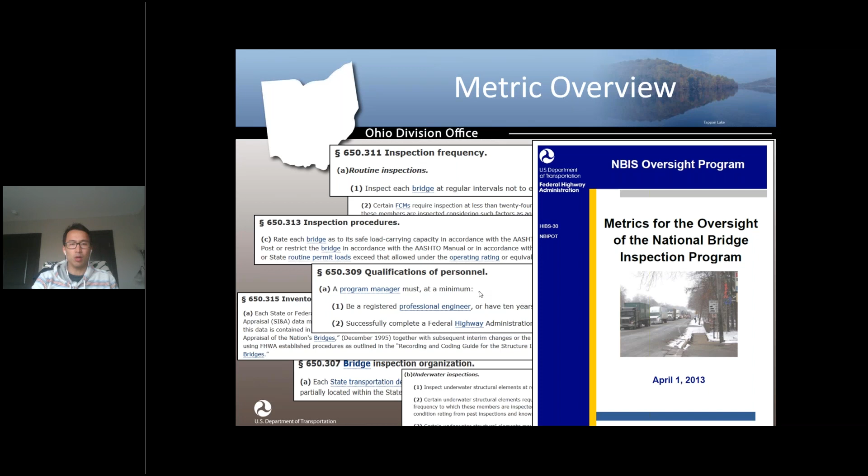So the 23 metrics is kind of a black box for those outside of the agencies. What it is, Federal Highway took the NBIS regulations and broke it down into 23 measurable metrics, and does an assessment on each one. You have four types of compliance status.

Compliance means everything is all good, and substantial compliance means there's deficiencies that need to be addressed that require a short-term improvement plan, what we call an IP. Conditional compliance is more substantial deficiencies and requires a more long-term plan called a plan of corrective actions. Non-compliance means deficiencies not resolved - that's something we don't ever want to be at.

As we started this new 23 metric process review in 2011, for the whole state of Ohio we had 11 compliance, 11 conditional compliance, and 1 substantial. As of last year, we improved all the way to 19 compliance, 1 conditional compliance, and 3 substantial compliance. So we've made huge progress in the last 9 years.

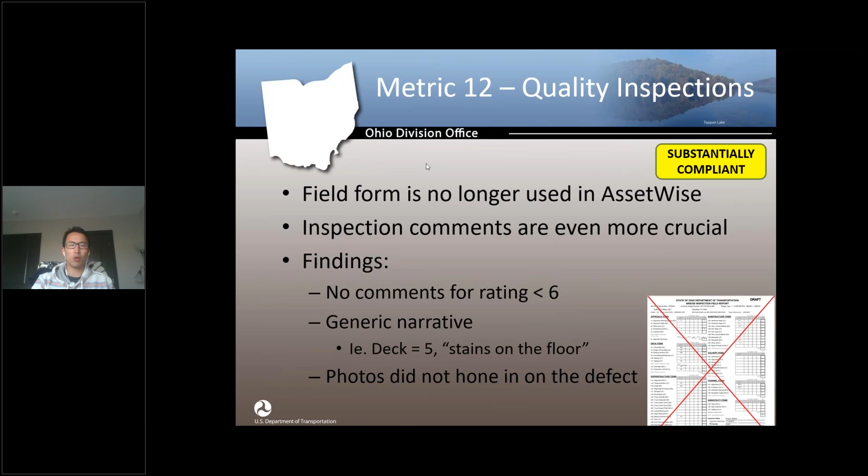So for this metric, we found a handful of bridges that do not meet the intent of the metric requirements. This metric is substantially compliant, so it requires an improvement plan: ODOT would develop written standards for consistent reporting and inspection comments, and present a webinar to the inspection staff, which is what we're doing today.

That's something Mike Brokaw will go over in the later presentation, and then provide comments for all the condition ratings less than 6 in this inspection cycle. For action number 3, we'll have until the end of the year to complete this.

Okay, moving on to metric 18 for scour. We random sample 19 bridges again, and if a bridge is scour critical, we check the bridge file to make sure there's a plan of action. Also, as you know, we started collecting channel photos.

The inspector has the option to either do channel photos or a channel profile. Most people opt for channel photos because it's quicker and easier, and we want to make sure the channel photos are done correctly. Then we want to verify that item 113, the scour rating, is consistent with the coding guide.

So in the findings, we found one bridge that is scour critical did not have a plan of action. Upon further review, the bridge is no longer scour critical, so we gave it a pass on that one.

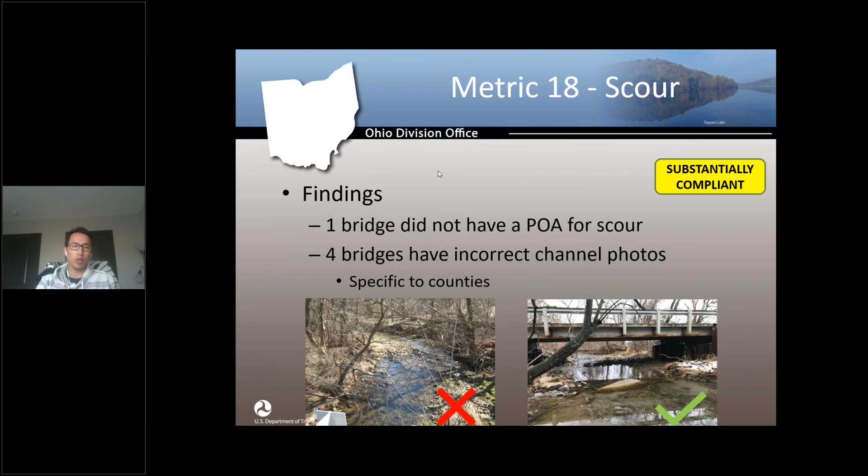So the action items are: present a webinar to inspection staff, and Mark Stockman will go over the proper ways to take channel photos. Action number 2: Mark Stockman is retiring, so Mark Sherman will spot check some of the inspection reports in all the counties and make sure all the channel photos are taken in the proper direction.

And lastly is metric 21 for critical findings. Again, we random sample 15 bridges that have critical findings. We want to make sure FHWA is notified periodically, and when a bridge is considered a critical finding, that means a condition rating less than 3.

They would have critical finding forms or inspection comments documented discussing the critical findings and how they're going to be addressed. More importantly, we want to make sure immediate actions are taken in a timely manner to address those critical findings.

Of all 15 bridges, we found one bridge that took about 4 to 5 weeks to implement the safety actions to put the barrier to divert the traffic. I think it's the deck and guardrail that has a lot of cracks and it's unstable, and the owner took too long to implement the safety actions.

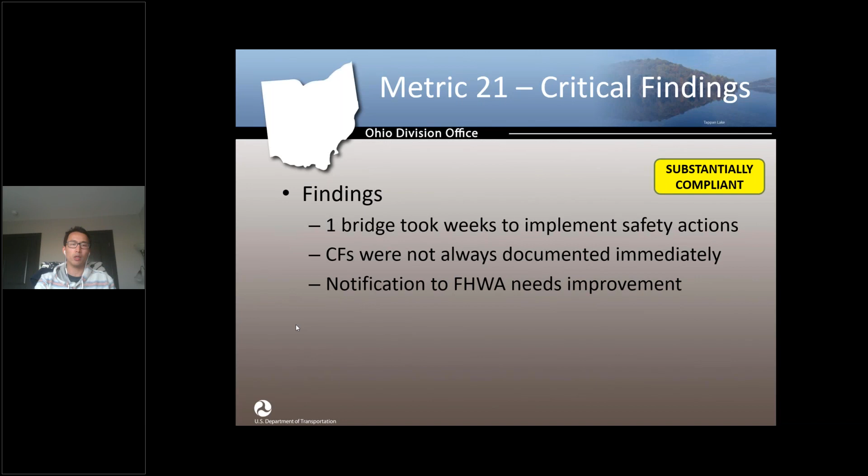So action number 1 is create a new critical finding form. This is a form you can find in AssetWise today. Whenever you rate a condition component rating less than 3, you would go into this link and fill out the critical finding form.

And whenever an inspection report contains a condition rating less than 3, ODOT and me and the owners will receive an automatic email, to make sure that the critical finding is addressed and followed up.

And lastly, present a webinar to the inspection staff. I think that's something either Mike or Mark will talk about at the later presentation as well.

So lastly, for the NBIS update, as you all hear, there's a new NBIS regulation coming out with the new coding guide.

Back in 2019, the proposed rule came out, and there was a commenting period that I hope all of you put comments into about what could be addressed and improved in the proposed rule. The commenting period ended in January 2020.

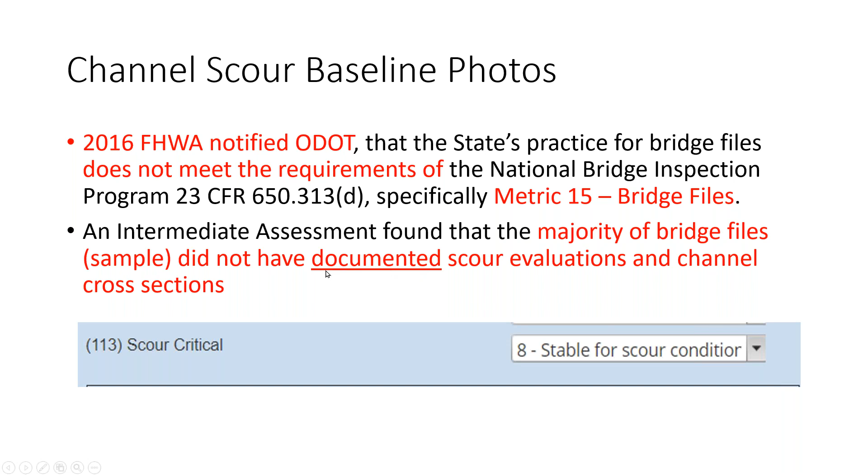But we never wrote down why we chose that code—we never had documentation. So most people chose code 8 or code 5. A few people had a code 4, which is mitigation for erosion. We don't want any code 6. But item 113 is what was driving this.

So to respond to that shortcoming, ODOT developed a procedure for channel cross sections and baseline photos. It's on the Ohio Structure Office webpage under the bridge inspection section, in the miscellaneous resources. You can read that procedure.

Basically, when you have a dive inspection or scour critical bridges where item 113 is a 3, 2, or 1, you must do channel cross sections. All bridges that don't have to do a channel cross section must have baseline photographs on file. They do not have to be uploaded to AssetWise, but it's better if you do.

Otherwise we have to contact you, dig them up, and mail or email them to us. It just saves a lot of time if you do put them up, though it's not required. And if you can't get photos for some reason, you need to do a channel cross section.

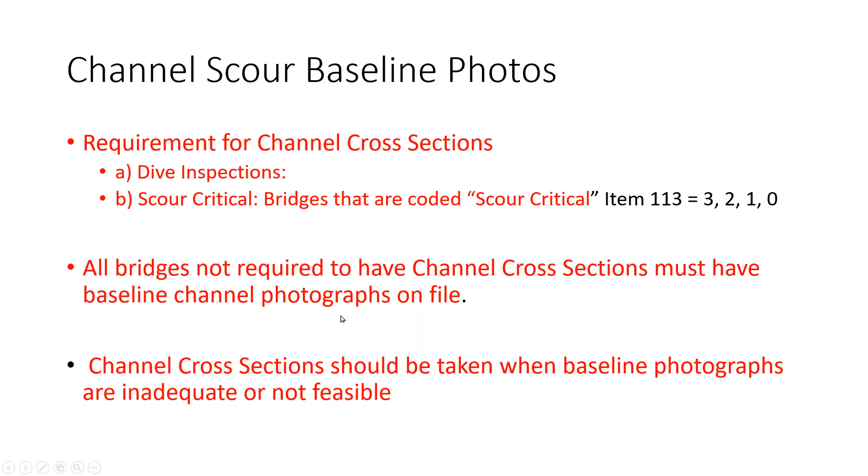For the channel cross section, there's a tutorial in AssetWise under the help section, under documentation. Then in each individual bridge, there's a section for channel bed measurements that gives you a table to input the data and columns and so forth. It will actually plot out a diagram of your channel based on your measurements, because you need to see what those measurements show—it's not good enough just to have numbers. We want to get an idea visually of what the channel is like.

If you're going to do photographs instead of the cross sections, then you also have to agree to a global statement. Most people forget about that. And if you can't agree to the global statement, you have to go back to the cross sections.

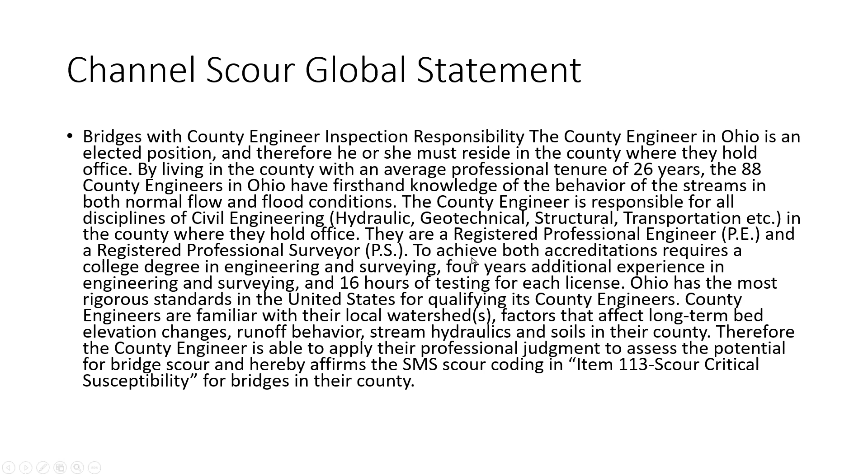So here's what the global statement does—the county engineer is elected, and it talks about his qualifications and so forth. But the key words are right here: the county engineers are familiar with the local watershed factors that affect long-term bed elevation changes and runoff behavior.

Therefore, the county engineer hereby affirms the SMS, which is now asset-wise, Scour Code Item 113. If your county engineer does not know the hydraulics of your county, then he can't confirm Item 113, and you have to go back to channel cross sections. But all the county engineers live in their county, and they know how the streams behave there. So Item 113 is hopefully verified by the engineer and his staff, and that gives everyone a sense of confidence.

That it's done correctly. The photos, you need a minimum of 2 photos, but add more if needed. You need to be upstream and downstream looking at the bridge. And as I mentioned before, we recommend but not require upload to AssetWise.

So the first deadline was in 18. We have to repeat them every 60 months. So in 2023, we'll be looking at repeat. And that's not only for the photos, but also all the channel cross sections. If you can't get the photos, do the cross sections and have them in your file.

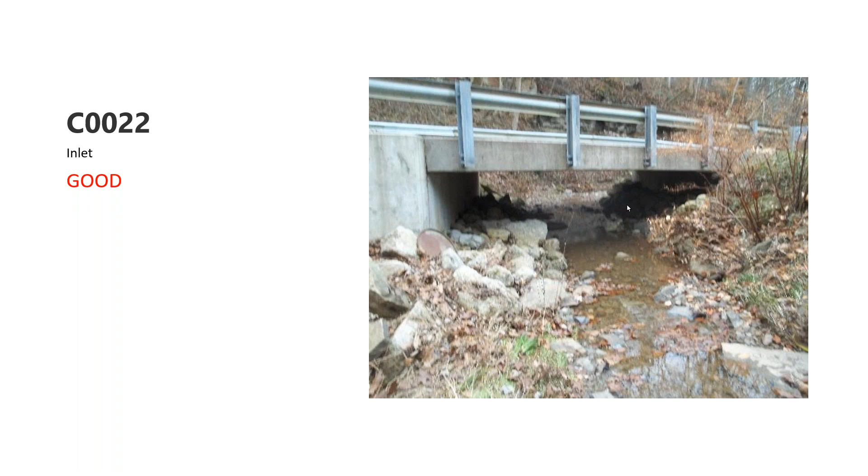I did have another side. Yeah, that's the same bridge, the other side, same thing. We can see it good.

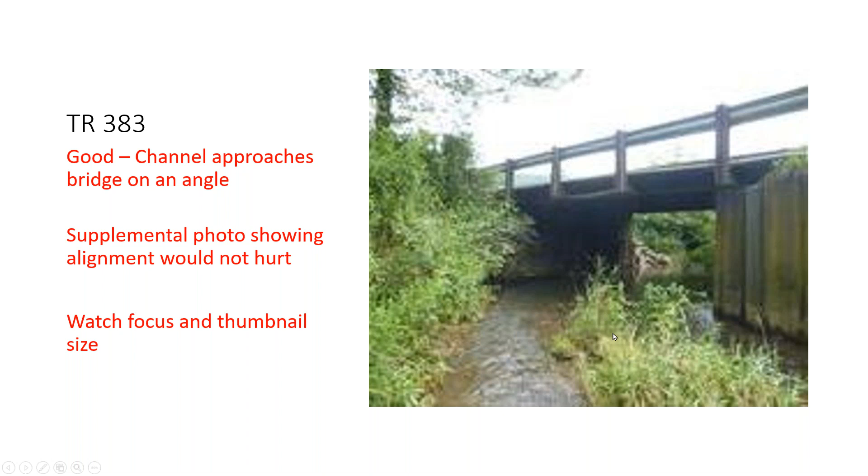Now, Township 383. I left the counties out to keep it anonymous, but here, this channel shows the angled approach to the bridge, and the photograph shows that. Another photo to show how that angle plays with the bridge would be helpful. And watch the focus. This was a thumbnail size picture. When you blow it up, it gets a little fuzzy. So watch that.

So here's the same bridge. Here's some additional photos. This helps a lot. We can see it's on bedrock. We can see the piling goes down. It's a good additional photo.

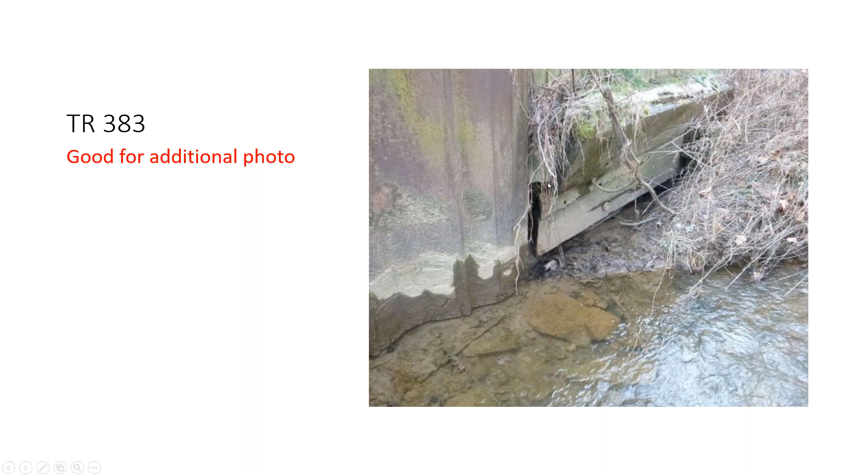Another good additional photo. The channel is just starting to possibly get behind the abutment here. It's good for comparison in the future. Another good additional photo shows the solid foundation for the abutment. Same thing here. So those are good examples.

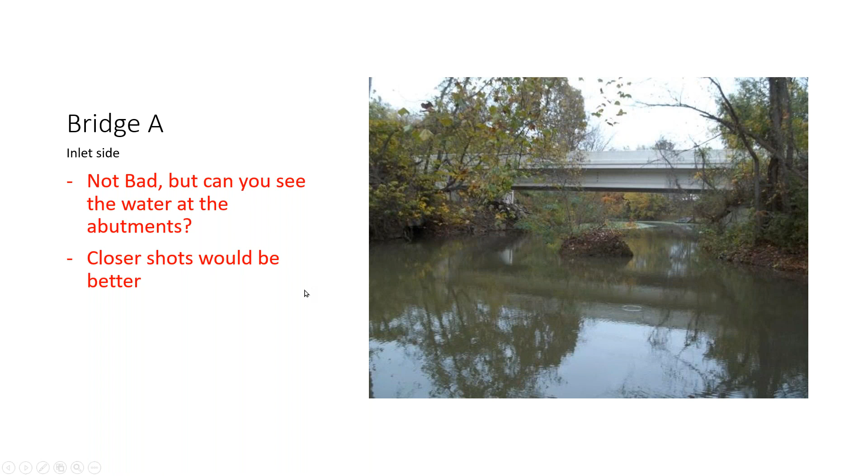Here's a bridge. It shows the bridge from the channel, you think, okay, that's what they're asking for, but it doesn't show us what we need to see. Can you see the water at the abutments? Can you see if it's endangering the abutments, or if there's going to be anything you need to watch? Closer shots would be better.

Here's a bridge. We're looking away from the bridge. This will not count as a channel baseline photo.

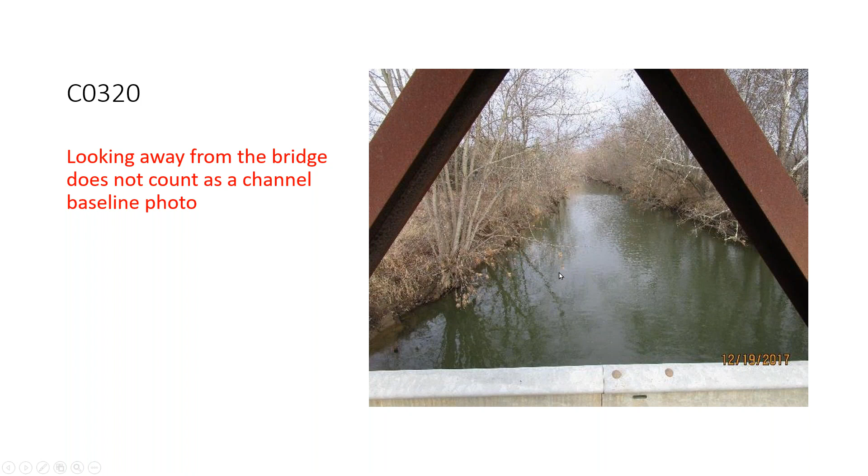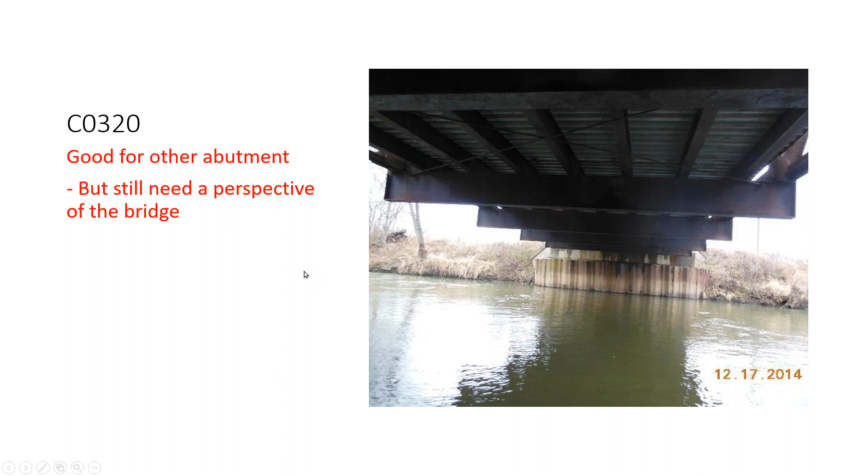Same bridge. Here we go. Now we can see what the channel is doing at this abutment, but we still need an overall picture from back looking at the bridge so we can see how the channel flows under the bridge. I can see the other abutment now, and that's good. I'd like to see a little picture about whether water is getting behind the wall or not. So, again, we still need a distance, a perspective photo showing how the channel flows under the bridge, upstream and downstream.

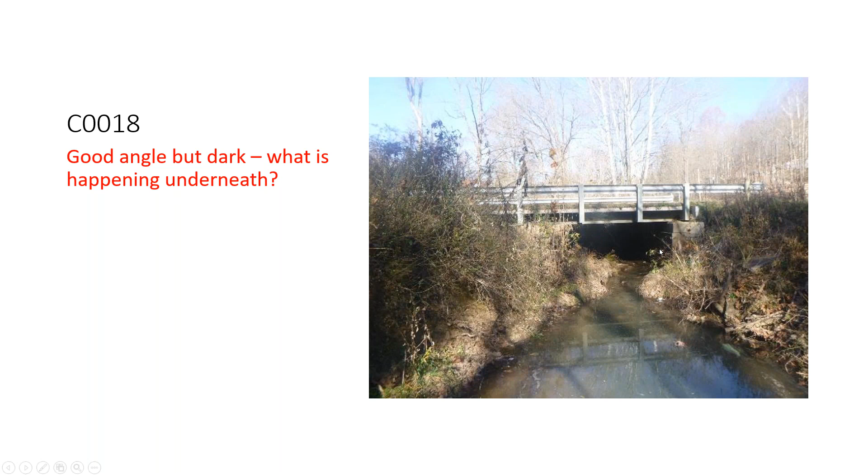Same bridge, more photos, trying to get it right. It's dark underneath, I can't see anything of what the channel is doing. So what's happening? Same bridge, a little lighter. I think the channel is going along that abutment.

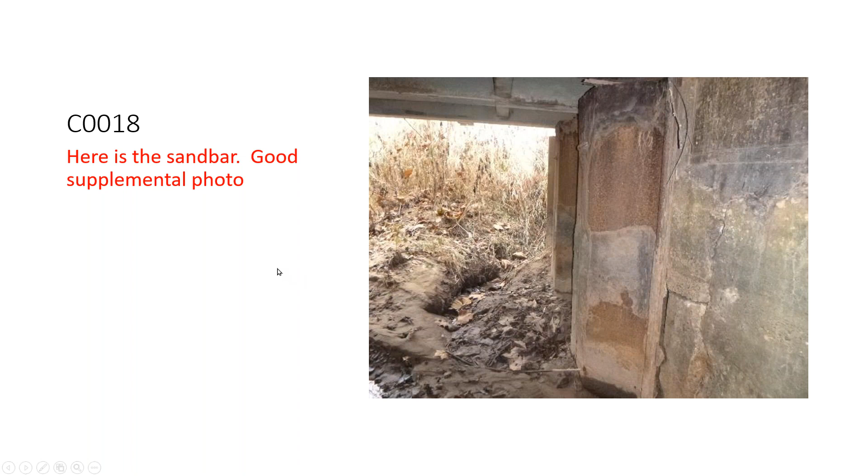The comments refer to old concrete and a sandbar. Well, here's the concrete, that's good, we have that in the photo. Here's the sandbar, that's good to have in the photo too. These are good additional photos now, so we're starting to get a clearer picture, something we can refer to in the future. This is a nice photo underneath. The sun makes it hard to see, but now you can see the channel is along that abutment, and the toe on this side is not against the abutment.

So you need to become an amateur photographer as well as a bridge inspector. You need to watch your exposure, the picture size, the sunlight, and compose your pictures properly.

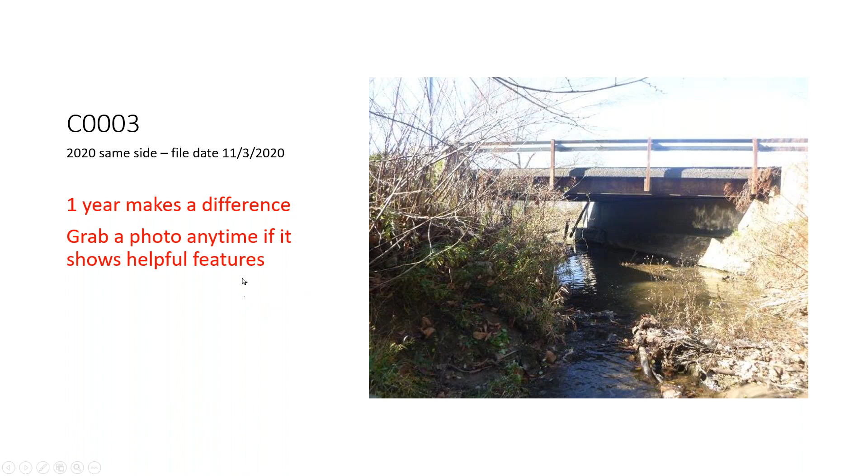This is in 2019. In 2020, they took the same picture and it's changed a little bit, which is good for reference. But grab a photo anytime if it shows helpful features. For example, compare the two: 2019, that is an excellent photo. 2020, that's pretty good, but not quite as clear as 2019. It just gives you an example - if you have a time of year or a different inspection that shows better photos, grab it and use it for your channel photos.

This bridge on the right, same one. Here's the cattle fence, and look, now we have a gap below the foundation encasement. Here's the close-up of that gap. But the comments refer to the rear and forward abutments, right and left side. It'd be really helpful if you could label these pictures - we don't know which comments apply to which part of this picture.

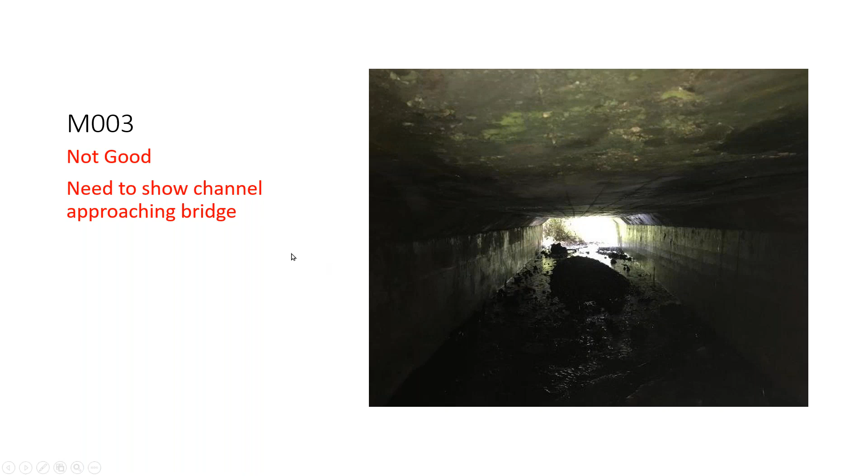Here's a typical photo I see a lot on culverts, where they're standing inside the culvert taking a picture through. It does not show what we need to see, how the channel is approaching the bridge. So one from the outside looking down doesn't help at all. Here's the bridge, and I can maybe see the channel toe on that side. It's really hard, dark, can't see anything on this side, so that's not going to help.

This angle is better. I can now see the flow line, the channel, the toe of the channel right here, the sand beach. I can see the toe of the channel over here, but I can't tell if the channel banks are flat, if they're scoured, if they have a hole. I can't tell the shape of the channel banks or the shape of the waterway opening. So this is not a good angle to take your channel photo from.

You want to be in the channel, not on top, or at least on the bank far away from the bridge.

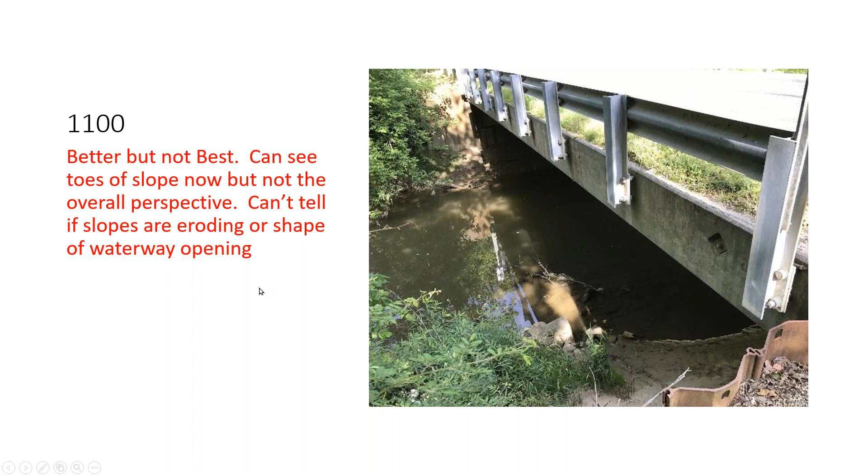Here's a picture. You think at first, hey, this is exactly what they want, showing the bridge, showing the channel. But really, I cannot see the channel bottom on the left or the right, so it doesn't show me what I want. Look on the right - this is just a little bit closer, and it helps a lot. Now I can see the channel on the left side, I can see the channel on the right side, a little sandbar blocking the way. This is great, just being a little bit closer helps.

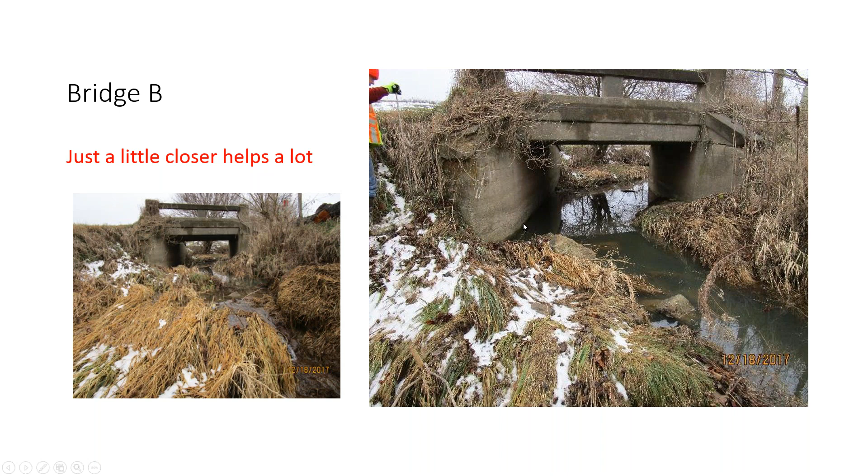Here's the bridge, can't see the abutments. We need different photos. Here's a better picture of the same bridge - now I can see the flow line on the left-hand side, and right there is a flow line on the right. It's helpful to zoom in a little bit on that photo.

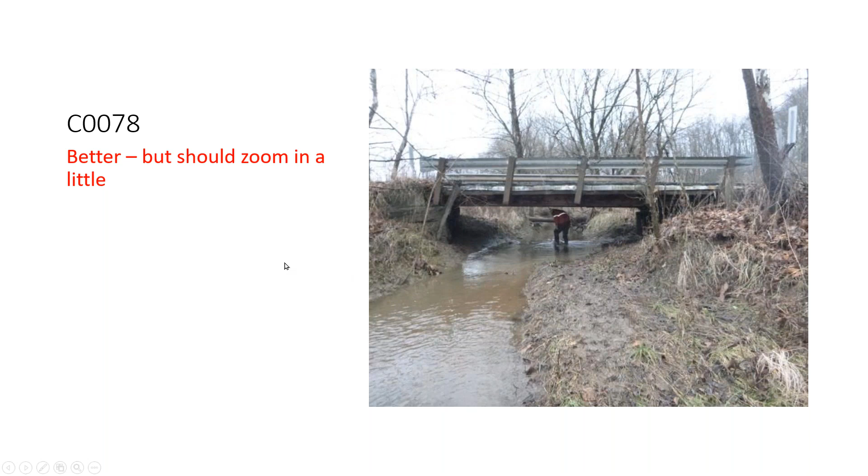Okay, recap. We need to see the channel alignment approaching the bridge and at the toe of the channel at the abutments, one upstream, one downstream, looking at the bridge. If you have poor visibility, brush, whatever, consider using a drone or coming back in the wintertime to take the picture or take a group of pictures.

And if all else fails, take channel cross sections. We need enough detail to compare in future years. We want to look for flow line changes, direction changes, scour, sandbars. And we want to see labels, so which direction you're looking, which abutment you're looking at, which side, upstream or downstream, any particular features. So with that, we're ready for questions, and Mike Burkow can help answer them as well.

Thanks, Mark. Good pictures. I got some questions for you. Ready? Yes. Okay.

When taking updated scour photos, should we strive to take photos from the same angle as previous? Or if better ones can be taken, should we take the better ones? Or both?

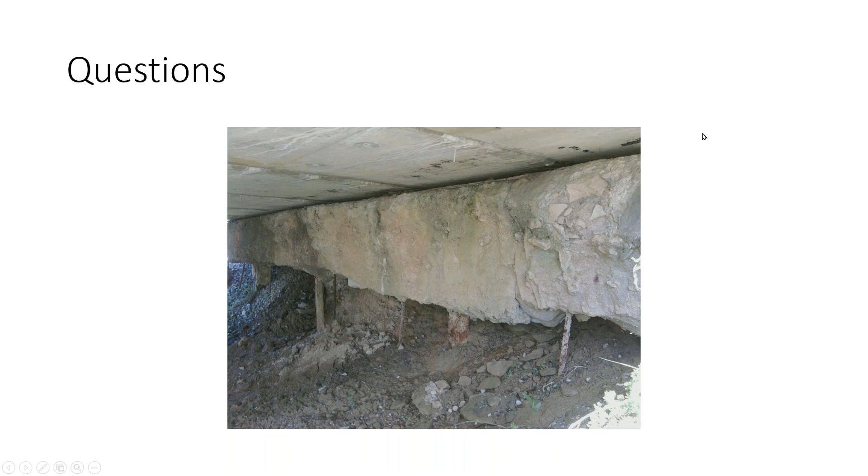You've done the work and gotten there. Snap a couple extras, especially if you can get a better angle for the next inspector. You're also thinking about 5 years from now or 2 years from now, that person trying to repeat the photo, and they'll have a better option if you have a better angle. Yeah, it's a great question.

Got some comments regarding using unmanned aerial, a good technology for channel banks. And the question was, do we need channel photos on non-NBI bridges? It's not required by the feds, to my knowledge, but it's a good idea. But we aren't going to grade you and affect the metric compliance.

Is there a limit in AssetWise for storage of pictures? Well, we haven't found it yet. The short answer is no, but what I would recommend is limiting the megapixels of the photo. Try to bring it down to 1 or less than 1 meg. And I have noticed with some of our more complex structures with lots and lots of photos and files, they do load slower when you bring up the asset detail page. So it's something to keep in mind there.

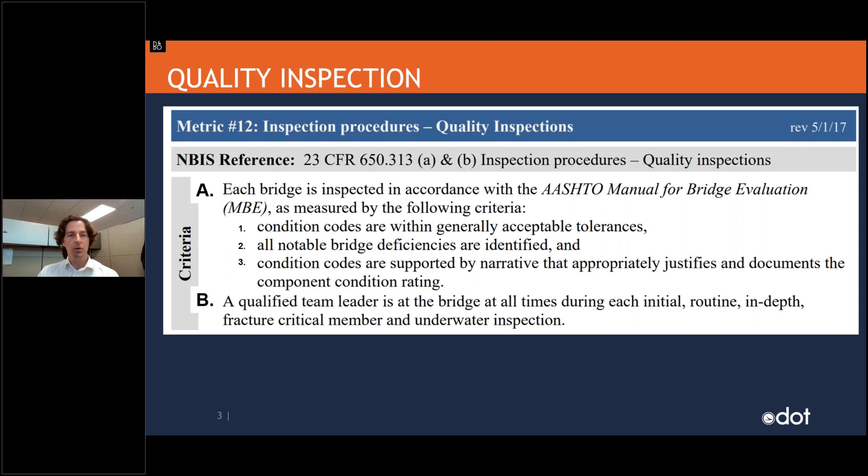So let's look at what a quality inspection is by starting with the reference. The MBE—AASHTO is American Association of State Highway Transportation Officials, of which Ohio is one active state. We're a member of AASHTO, and we vote, and we're active, and we play an active role in helping vote and develop a lot of these publications. Within the MBE, there are two sections that apply to bridge inspection: the bridge files and documentation, and section 4, inspection.

Both apply. What I'd like to do, mainly because most of you perhaps haven't read through this, is share with you some of the bullets within the routine inspections. There's 14 bullets. When each bridge is inspected in accordance with the MBE, we've got different routine inspections: the routine, fracture critical, underwater, etc. This is just the routine. There's 14 things that the MBE says you have to do to have a quality inspection.

Number 1, determine the physical and functional condition of the bridge. Number 2, identify changes from the initial inspection and identify changes from the last inspection—so tracking change. Number 4, ensure the bridge continues to satisfy its intended purpose and safety requirements.

Number 5 is inspect from the ground, from the deck, from the water. We expect wading and probing of substructure units and walking through every culvert, probing for undermining, probing for scour.

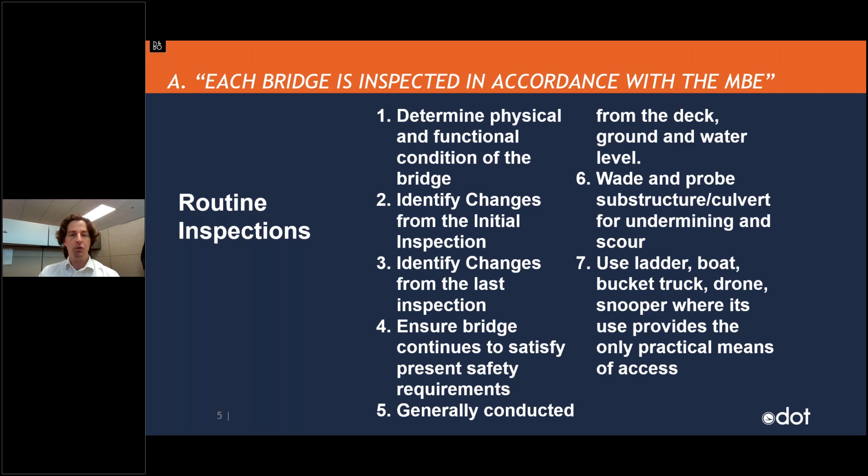And here's the kicker: when necessary, and you have to decide based off of what you see, get closer. Use a ladder, a boat, a bucket truck, drone even, a snooper, where its use provides the only practical means of access. Number 9 is get close enough to determine all condition ratings and element quantities and condition states, evaluate all height and weight restriction signs, and then note suspected or confirmed weight or height posting values.

For scour critical bridges, follow the POA. And 14, for critical findings, follow the critical finding procedure. Jared and Omar are going to talk about critical findings in a little bit, so I'll save that for them.

A1, so I'm going down and using that metric 12 criteria as my outline. Condition codes are within generally acceptable tolerances. So when we talk about condition codes, we're talking about the components or the overall. So the deck, the super, the sub, each one of those get a 9 through 0.

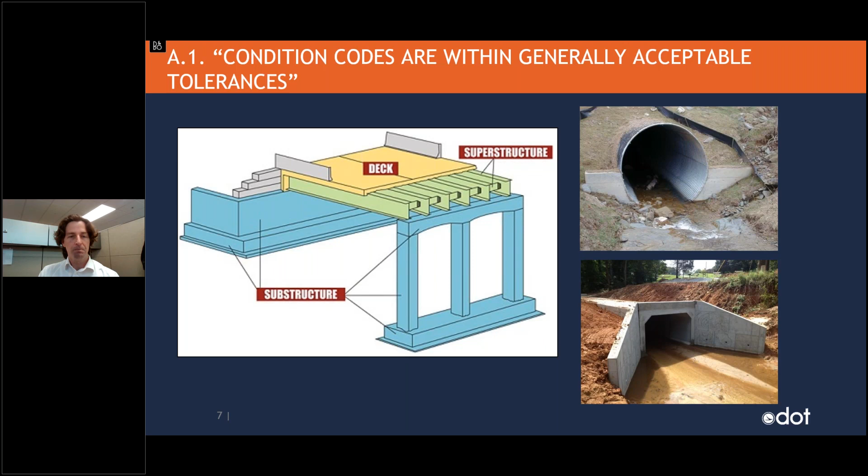And you might notice this is different from the BR86, where we cut away all of the individual 1 through 4 items, and now we just have a small group of the major components on the bridge. If it's a culvert, like the photos on the right, flexible or rigid, then you code the culvert 9 through 0. So those are our component ratings.

Is the 9 through 0 within a generally acceptable tolerance? Now, what on earth does that mean? Well, let's break these out. So the 9, 8, 7s are good. Then we have the fairs, and then the poors, and then the criticals.

In general, generally acceptable tolerances is within 1 of Mark Stockman, Mark Sherman, myself, Omar, those of us doing quality assurance like Kenny, within 1. And I have, not many times, but I have had a number where I said it was a 5 and the inspector said it was a 6, and I said it was not within general, not acceptable. So you can have ones within 1.

The 5 to 4 line, for example, that 5 to 4 line is very important. And if I give it a 4 and you give it a 5, that is probably not an acceptable tolerance. So, but in general, within 1.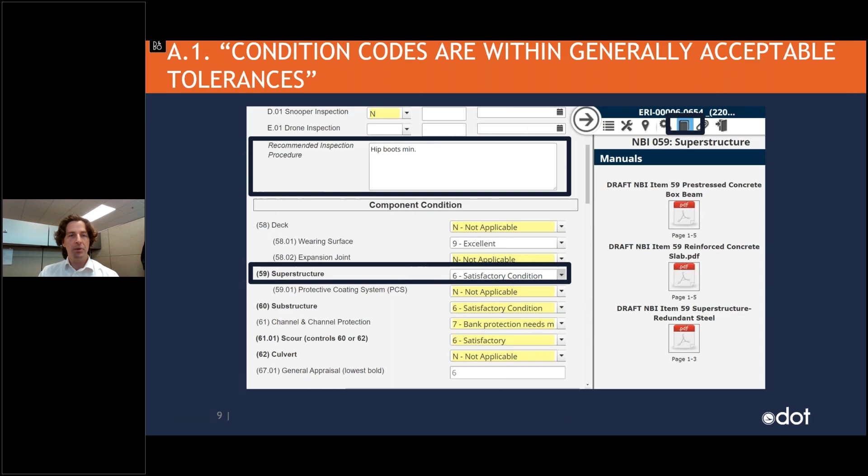So when you open up the PDF, we have photos, we have helpful hints in how to code the 9 through 0s. So within generally acceptable tolerances, within 1.

If we look at the second bullet, all notable deficiencies are identified. What does that mean? Well, Federal Highway, AASHTO, they both say that notable is 5 or less. And I would say because we're within 1 of Federal Highway, why don't you just jump it up to 6 and less? So notable deficiencies, if it's 5 and less, you need inspection comments.

And with a 6, it's a good idea to have comments. So this is just the low bar. I know a lot of you, for a 7, you're putting good comments in. We're just establishing the baseline here.

And here's a paragraph from the document that we sent out earlier. It is considered good practice to include an appropriate description for components in all conditions. Appropriate justification of determined ratings means the lower the value of the condition code, the amount of report time and documentation increases to thoroughly describe its location, extent, and severity.

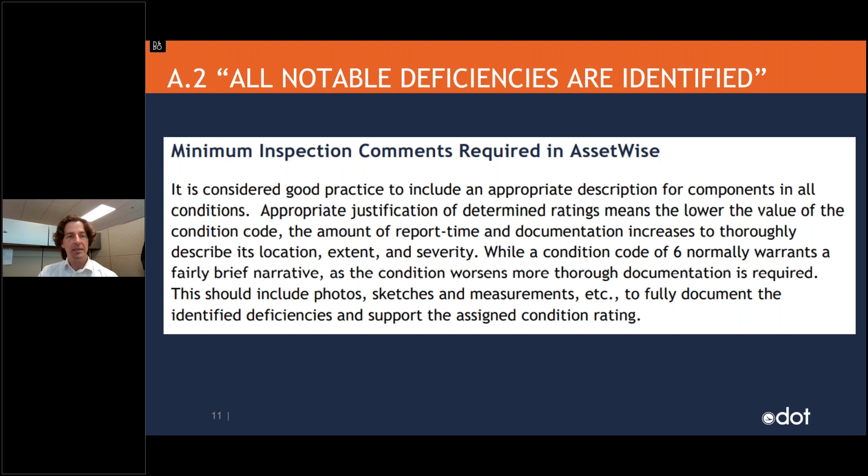While a condition code of 6 normally warrants a fairly brief narrative, as the condition worsens, more thorough documentation is required. This includes photos, sketches, and measurements. Fully document the identified deficiencies. Now, what's the big change here?

We've always said a 6 rating, you probably want comments, a 5, you need comments. The big change is what's highlighted at the bottom: at a minimum, inspection comments specifically are required in AssetWise. So that is what's changed.

We have this place that you have to put your comments, and when? Well, any NBI component—deck, super, sub, deck channel—rated 5 or worse, that is when comments are required. So if we stay within this, all notable deficiencies are identified. In summary, it's 5 or less, those leading to a component rating of 5 or less.

Another thing we're looking for, ensuring that the inspection was done with high quality, is: were certain areas accessed? Were certain areas not accessed? Over the life of the bridge, say it's been out there 50 years, has there ever been a ladder put up at the bearings? For a fracture critical member, are we getting to both sides of the steel? So were certain areas not accessed?

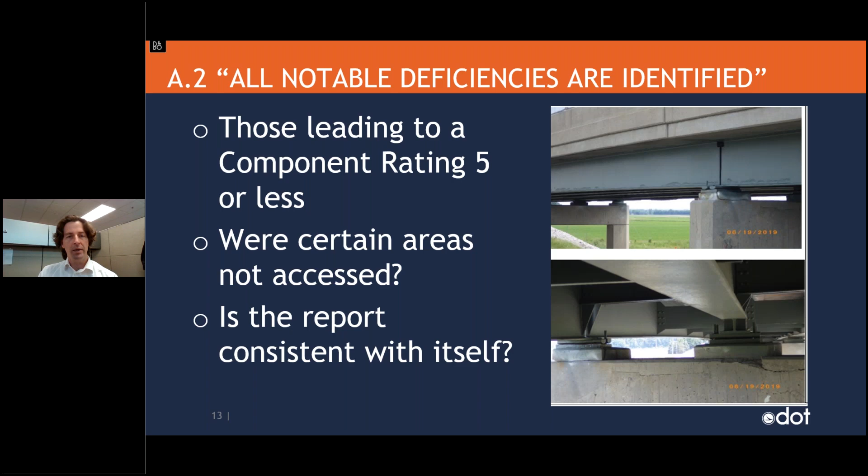And lastly, is the report consistent with itself? That's where we want inspectors to begin looking at different parts of the report. So you have the component ratings, you have the element ratings, you have photos, and you have inspection comments. It should all correlate. It should all be saying the same message.

Now for time and simplicity of message, what I'm talking about is the comments, because that was the thing that was lacking from the review last year. And this idea of coding 9 through 0—I mentioned the 5 to 4 threshold is an important threshold. If we look at that 5 to 4 threshold, let me throw a bone to you that a 4 for poor is adjective advanced.

So for pre-stressed box beams in general, you have more than a quarter of the strands exposed. And exposed means not just visible, it means exposed to the elements. They could be underneath the delamination, underneath some longitudinal cracks.

For section loss, it's more than half of the web lost, or a quarter of the flange lost. If you're curious about how to measure section loss and what 50% and 25% means, watch the online refresher—I go into great detail, probably too much, on how to measure section loss. If you've already taken that class, watch that section again.

For corrugated metal pipe, for our culverts, it's going to be holes. Scour advanced would be exposed vertical faces on a spread footing, or if you have deep foundations, one pile exposed up to 5 foot—that's an easy advanced.

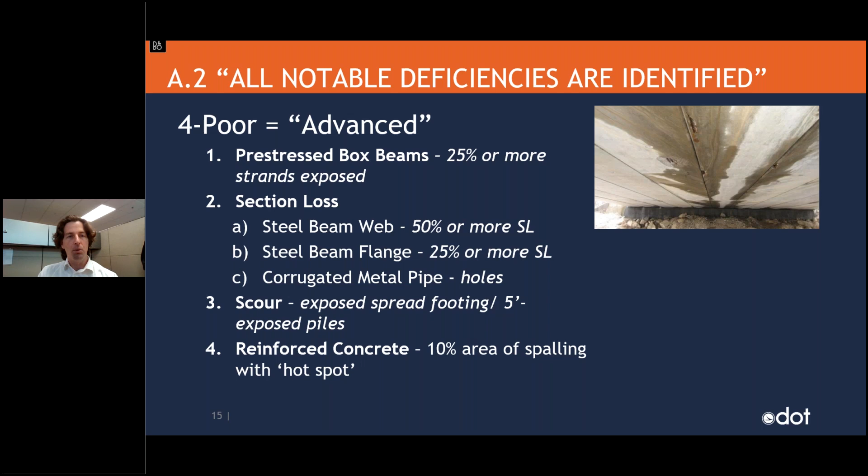So the next section is: condition codes are supported by narrative that appropriately justifies and documents the component. This is right out of that document shared through email, it's in AssetWise, and now it's in the GoToWebinar handouts. Write comments in AssetWise using language readily understood by inspectors, engineers, planners, and maintenance staff. Comments must be sufficiently detailed for those in the inspection process to prioritize maintenance, scope repairs, perform preservation, and monitor the rate of change.

Avoid the use of language that is confusing. This was all over the 2010 manual, and if the future manual ever gets completely updated, location, extent, severity will be emphasized again. Every defect—so you have a bridge coded a 5 with a controlling defect—you have to identify where that defect is, how widespread the issue is, and how severe.

The worst location is, and how typical it is. So a helpful acronym is LES—less is more—location, extent, severity. And those of you with the manual for bridge element inspection will notice I showed the percentages there that pop up on the rectangles.

That is what 1% looks like—that would be an example of how widespread something is. The best way to communicate how widespread something is, is through percentage, through numbers. You've got to make sure those numbers are accurate. So if you want to calibrate yourself, open up the manual for bridge element inspection—there's a 1%, a 2%, a 5% that really helps calibrate.

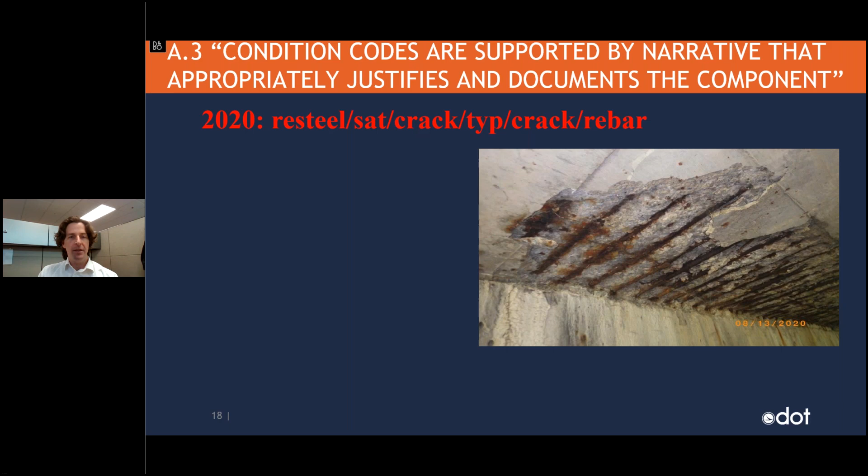A better description of that photo would be: slab above the rear abutment at centerline, 24 by 4 foot spall exposing primary bars, 14 bars with 360-degree exposure, cracking and wearing surface above.

So now we have an opportunity when you come up to a bridge like this, that's a 5 or even a 6, delete the bad comments. If that comment's not doing you any good, it's not doing the future inspector any good, make it better.

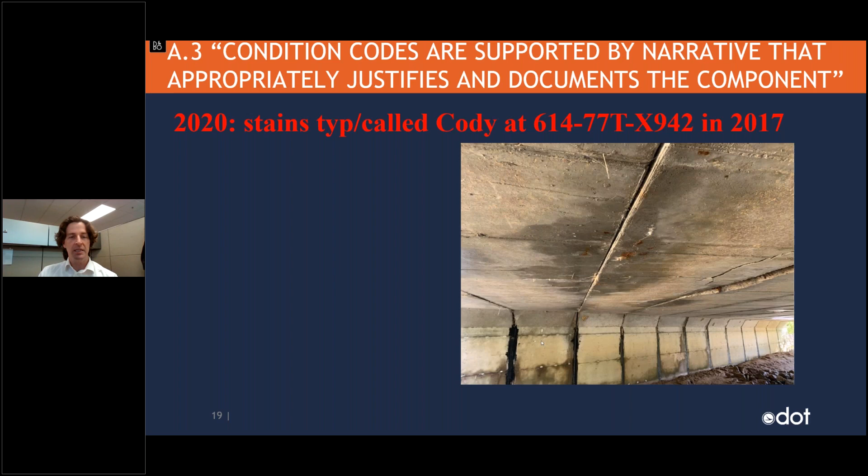Here's one that I've seen: '2020 stains, typ, called Cody, here's his phone number, in 2017.' So no maintenance blaming, don't throw Cody under the bus. Now his phone number is a public record.

So 2020, there's no notes. No notes — that's no longer acceptable. If it's a 5 or worse, we've got to have that into AssetWise.

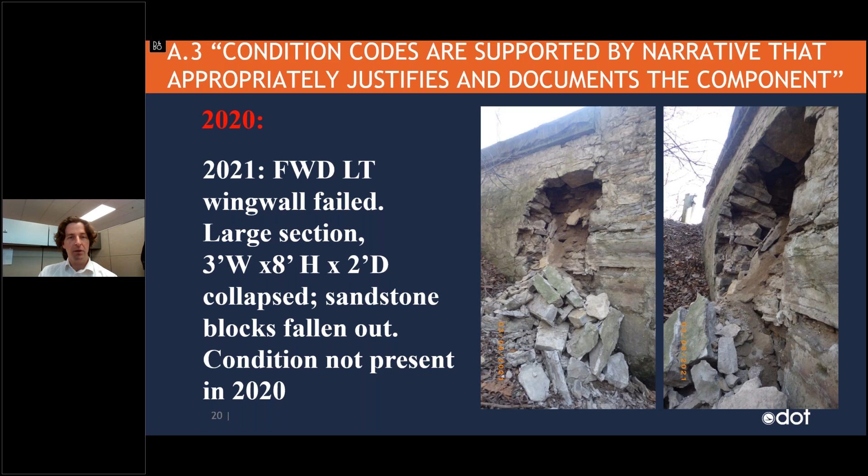Here's the forward left wing wall failed, large section, 3 by 8 by 2, collapsed, sandstone blocks fallen out, condition not present in 2020. That is a helpful note. Now the photo really speaks volumes — if you have something failing, the photo usually speaks a little louder than words.

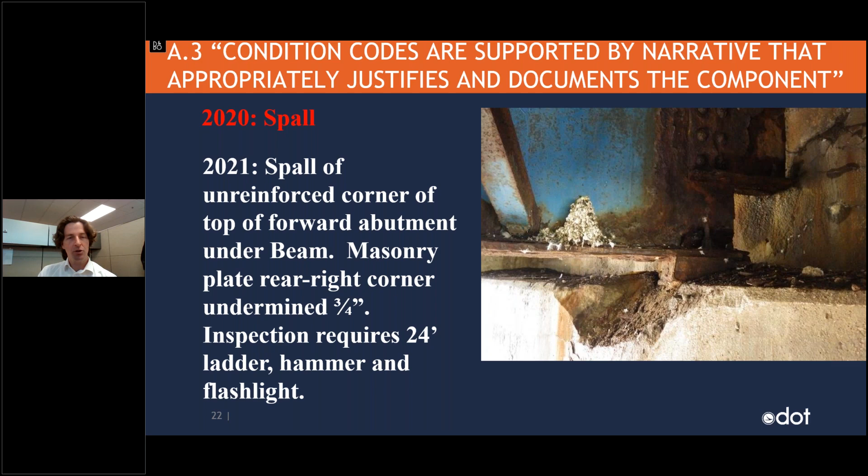All right, so that's the main criteria within the MBE, some examples of good and bad comments. Let's now move into the last criteria, the qualified team leader.

There's 5 ways to become a team leader. You can look at that. And because the team leader metric — metric 3 — was reviewed, you may notice you may be getting your 15th, 20th email from Suzy Pettet in her office.

She is hounding you. We need not just word of mouth that oh, he's good or she's good, we need a paper trail. We need to document how you meet the minimums for team leader. So please excuse our thoroughness — we have to communicate to people outside of Ohio why you meet team leader qualifications.

And there's 2 major criteria: the experience component, which I'm not going to get into, and the training component, which I am going to get into. You have to have a comprehensive bridge inspection training class, and you have to have periodic bridge inspection refresher training. You have to have 2 classes.

Now let's look at the comprehensive bridge inspection training. To my knowledge, we're the only state that has taken upon ourselves to do our own training, and has done our own training since the early 90s. And I think it's a good thing. So if you have the ODOT level 1 and level 2, and that was after Federal Highway last approved it — that's 2007 — then that's an easy win.

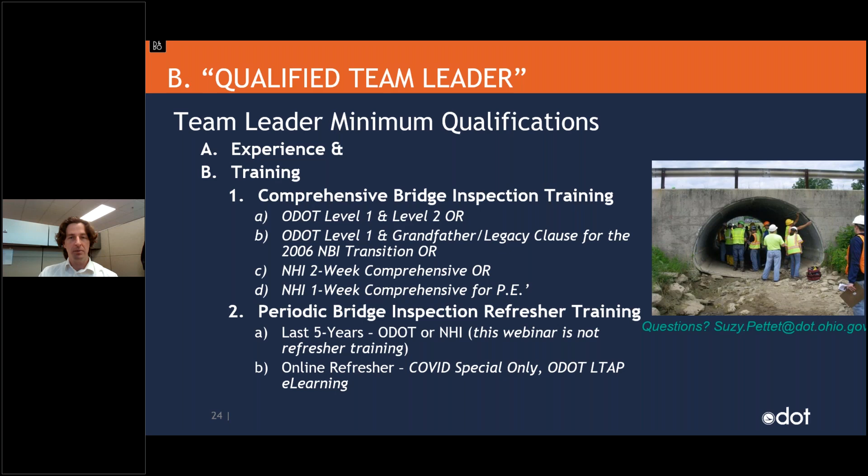So once we're allowed to go back in person, we're going to shut off the online refresher option. Now, what are we moving towards? Let me show you what Federal Highway is moving towards. Kenny mentioned the SNBI, the new Specifications for the National Bridge Inventory. One of the many fields we're laying the groundwork for is a National Certified Bridge Inspector number.

We have to communicate nationally how you meet the national minimums. That is why we are documenting, thoroughly calling everybody, emailing you, and getting everything in writing. We're documenting it and storing it in AssetWise. That is why the team leader requirement is a federal term, and program manager is a federal term. We are going to communicate them from the federal perspective by documenting everything. Even if you've been doing it for 50 years, and yes, there are people still doing it for 50 years, we need a paper trail.

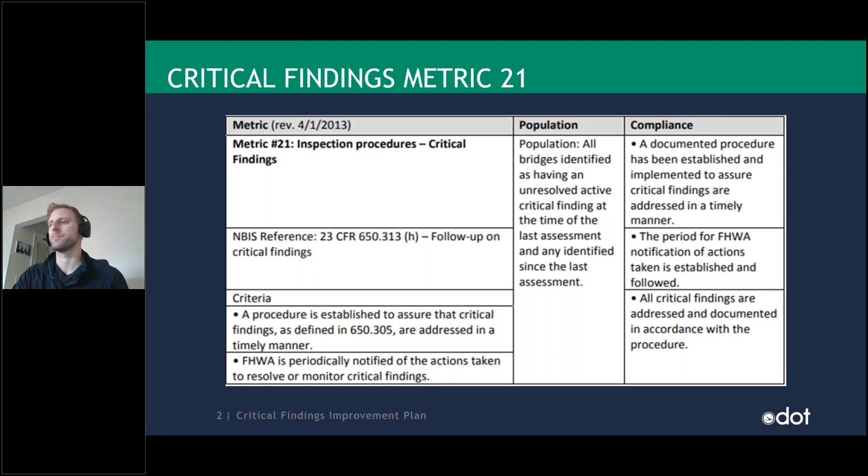Like Kenny said, Metric 21 was one of their reviews this year, and for critical finding review, Federal Highway sampled 16 bridges statewide with condition ratings less than 3. Their review findings were that we need more timely action from bridge owners when critical findings are identified, and a need for better communication of critical findings between inspectors, bridge owners, and Federal Highway.

And we need to develop a critical findings form. So we were given three milestones for an improvement plan by Federal Highway, and we'll cover those one by one.

First is what I wanted to show to refresh everybody: our critical findings flowchart. This is in the 2014 Bridge Inspection Manual, Chapter 2. I think right at the beginning of Chapter 2, we talk about critical findings. This is basically our way to step someone through the process of what to do when a critical finding is discovered.

Going down through this, importantly right at the top, the first box is a normally scheduled inspection. That's important for critical findings, because a critical finding is a new change or something not documented in the previous year's inspection that is found during a routine inspection.

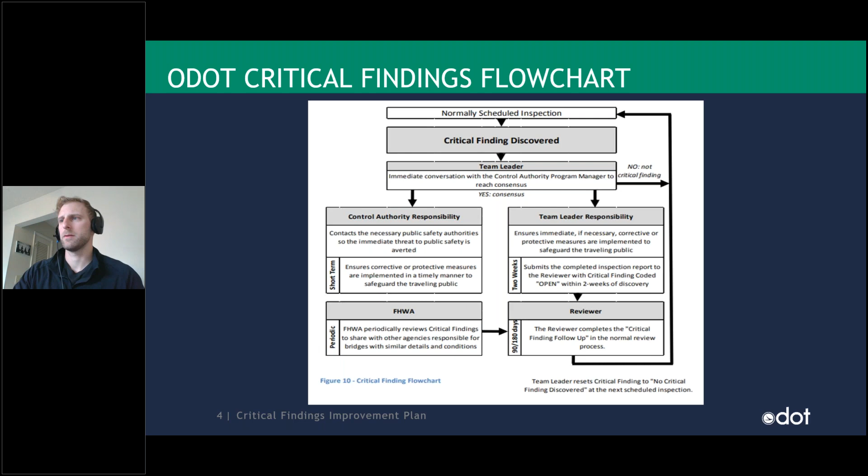So basically, our improvement plan milestone 1 from Federal Highway was to set up automatic email notifications in AssetWise to alert the owner, ODOT QA managers, and the division whenever the condition rating - basically item 58, 59, 60, 61, 62 - drops below a 3. So that's deck, super, sub, culvert, or channel.

If any of those 9 through 0s drops to a 2, then we should be opening a critical finding. So what I have here, the screenshot, is basically the generic automated email response that you will receive from AssetWise if you open a critical finding form, or if you start to fill out the critical finding form. I'm sure some of you have seen this before.

But basically, you'll be getting one of those emails if one of two triggers is set off. So, like I said, the deck, super, sub, culvert, or channel summary is brought down to a 2 or lower, or item 275A in AssetWise is filled out. So 275A is one of the first fields on the critical finding form, reasons to justify a critical finding. It doesn't have to be a 2 for there to be a critical finding.

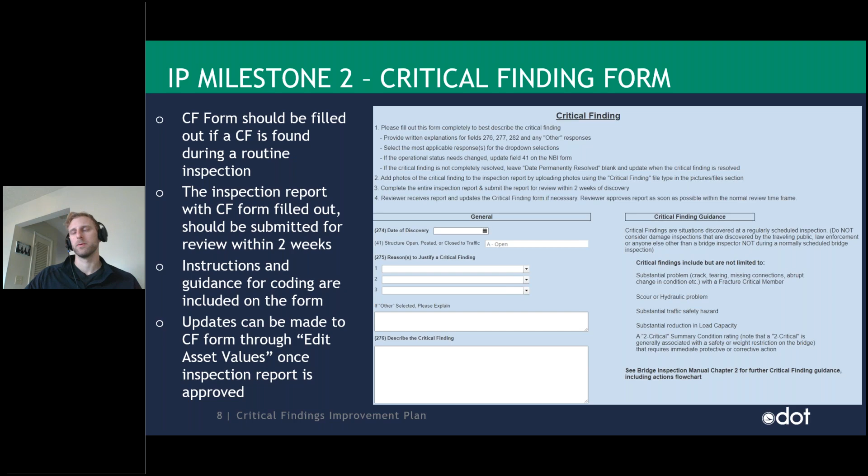Another question was whether a bridge requires posting once you bring it down to a 4 or below. What we state in the manual is that it basically requires a new load rating — not necessarily posted — but once you bring a bridge down to a 4 or below, we do require a new load rating of that structure.

So basically, to sum the critical finding form up: when responding to a critical finding, the inspector immediately communicates the critical finding to the control authority. An immediate action should be taken within hours of discovery. We've set limits on different types of actions. Immediate is the first — Omar will get into these more in his presentation — but there should be an immediate action taken within hours when a critical finding is found, just to make sure the bridge is safe, even if that means closing the structure completely.

Next, document actions taken. This is very important — that's where the critical finding form comes in. If you're filling out this inspection report in the field, the critical finding form is a great place to document everything you're finding. But if for some reason you go back to the office to fill your reports out and you're not directly at the bridge, please take very detailed notes about why you think this is a critical finding and what you're seeing at the bridge that leads you to think this.

What justifies this? And what have I done immediately — who did I call, who were the authorities notified? All things like that could be documented and put into the critical finding form. The more detail, the better, honestly. And then lastly, fill out the critical finding form and submit the inspection report for review within 2 weeks.

As mentioned before by Jared and others and Mike, things to keep in mind when implementing the critical findings: keywords, public safety, that's essential. I think we all strive to protect and preserve public safety. Everything we do in the bridge inspection world ultimately leads to public safety, so that's something to keep in mind always.

Critical findings are very, very important, and we cannot take the bridge all the way through cradle to almost grave and drop the ball at the last year. Maybe the bridge is just hanging in there, and the inspector finds something critical with it, and we have to address that all the way until the bridge is decommissioned, closed to traffic, and decommissioned safely.

Some more to keep in mind is resolved. When we talk about what's the meaning of resolved in the critical findings, it means action has taken place to stabilize the immediate safety concern discovered during routine inspection. I overemphasize on routine inspection, because critical findings are not something discovered casually. It has to be discovered during the routine inspection, so it's an official report, official process that we go through that documents the critical findings.

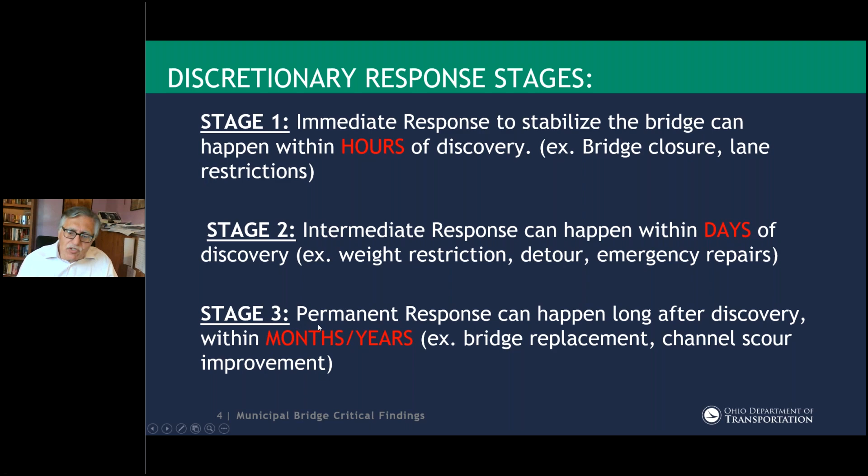It also might take days to do a detour or perform emergency repairs, as I'll show in some examples that happened on the municipal side of bridges. Finally, the permanent response could mean bridge replacement or channel improvement, which could take months to years depending on the funding and planning process of that locality. I know some bridges have been in process for 5 years until being replaced. That can be part of the critical findings too, something discovered, and then the city says, oh yes, we were planning to replace the bridge in 2 or 3 years, and that will be considered an action item also.

I suspect the culprit is the stay-in-place metal form with the asphalt wearing surface filled in the pan that cracks usually and then collects the water, and very soon the stringers and the beams get corroded, and over the years they rust through, affecting the load carrying capacity.

So the action item was to restrict the lane. This happened due to salting of the roadway and maybe the rainwater and whatnot, the dripping on the side. So the exterior beam or the beam next to it gets affected the worst. Also keep in mind that the cracks in the asphalt collect water, and the water stays in the pan for years and years, and that leads to corrosion throughout the bridge. But it looks like in this case, the exterior beams and the one next to it was affected.

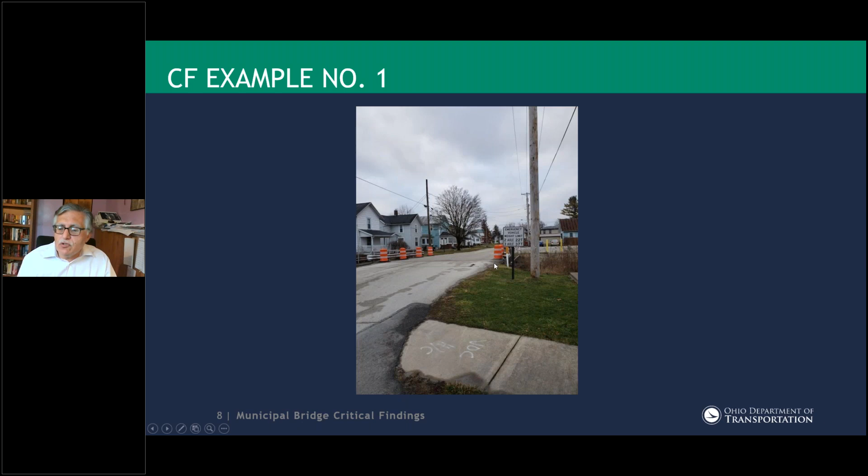And as a result, the inspector recommended the load rating. So load rating was performed and the bridge was posted. And it was found that the corrosion for the interior beams was not affected as bad, so it only required posting of the emergency vehicles.

Here is the items and the timeline of what happened to example 1. Notified on this date in December, early December, immediate action completed. The barrels were installed a day later, so that's good. And then the load rating happened about a month later. Load rating done, and the bridge was posted after about 20 days or so. So in conclusion, the action steps were reasonable, took reasonable time.

Example 2, this is a non-NBI bridge. It's a culvert actually. The inspector thought that he would like to file critical findings because there are action items that should take place after discovering this corrosion in the main rebar of the top slab. So they took measurement and determined the amount of corrosion in the rebar.

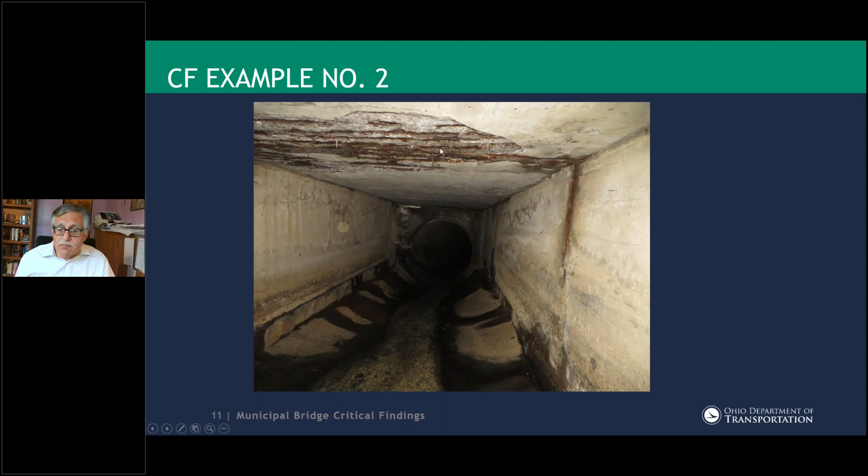And that's an overview. It looks like, even though it's localized, this is under the traffic, so it's possibly a wheel line of a truck could pass over this main reinforcement. So the inspector recommended a load rating. The bridge was load rated and was posted.

And if we trace back what happened, we look at critical findings was done in 2018, July. Load rating did not take until months after that. The posting was never documented in our system. It was discovered, or it was found it was documented during the next inspection, the same day that the critical findings was filed. When I look at the timeline in general, I just say that time took, it was unknown. In my mind, this is unsatisfactory performance.

If we use the time as a performance measure, this is not acceptable for that locality. It should have taken very decisive, clear steps on the timeline, taken days to post the bridge, 30 days, no more than 30 days. Even though it is non-NBI, I run the non-NBI bridges parallel to the NBI bridges, so the safety requirements, the 23 metrics that lead to protecting safety of the bridges, I like to use the same requirement for the non-NBI. At least we try to do that. And looking at this, it did not follow this at all, so I found this unacceptable for this bridge.

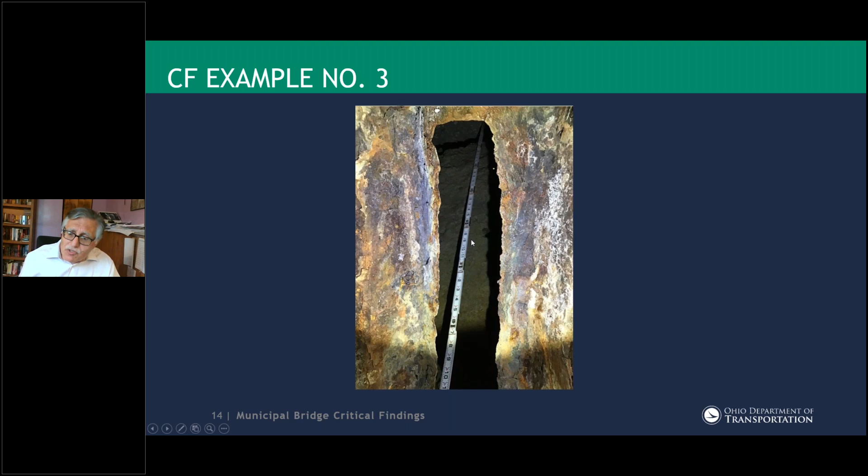So this photo really, it is not clear, but actually this is a corrugated metal pipe culvert, and this is a corrosion hole. This stick, it looks like it goes in like 3.5 to 4 feet behind the culvert. Here's another picture of the structural fill coming through the culvert, so we're losing that, and that affects the carrying capacity of the structure.

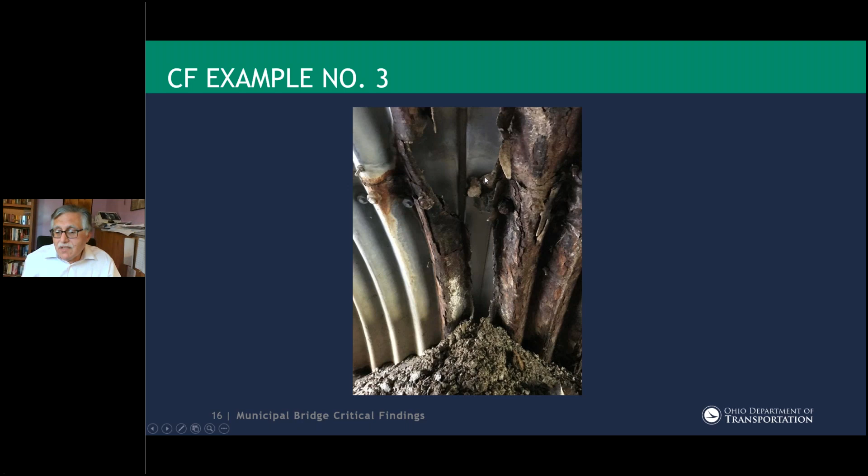More photos here of the fill, and it looks like they tried to repair it by putting plates. This happened last year, in December or November. The city did the repairs—they closed the roadway, excavated behind it, performed the repairs, and put the pavement back in place. Here's what the excavation looks like and what the repair plate looks like.

For this one, the inspector did a good job, and the city also did a good job communicating and acting on the action steps required. They were notified on 11/16/2020, and the same day, three hours later, the bridge was closed. Within a few days they completed the repairs, and in about three more days the bridge reopened to traffic. The city has that in mind—this August the bridge will be replaced. The action steps took a reasonable time. This is again a non-NBI bridge, but it's a classic example of how the city should treat these critical findings. They acted on it, and it was a success. Nobody was harmed, nothing happened.

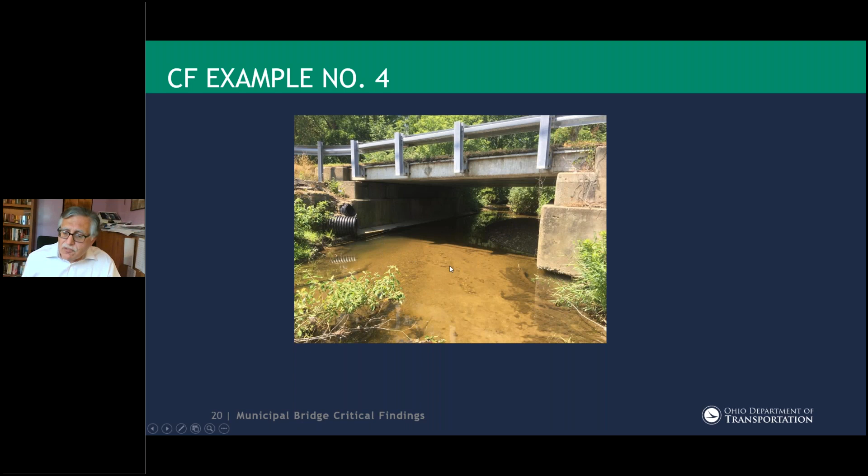The inspector tried to quantify the amount of scour, to see how far it goes under the footing. Here's what the city did after performing repairs—they put riprap and some kind of pedestal in front of the washed, undermined footing. This took a few days to do the scour repair, but that's understandable. It looked like about a month and a half, about six weeks, to do the repairs, and considering what they had to do, it looked reasonable.

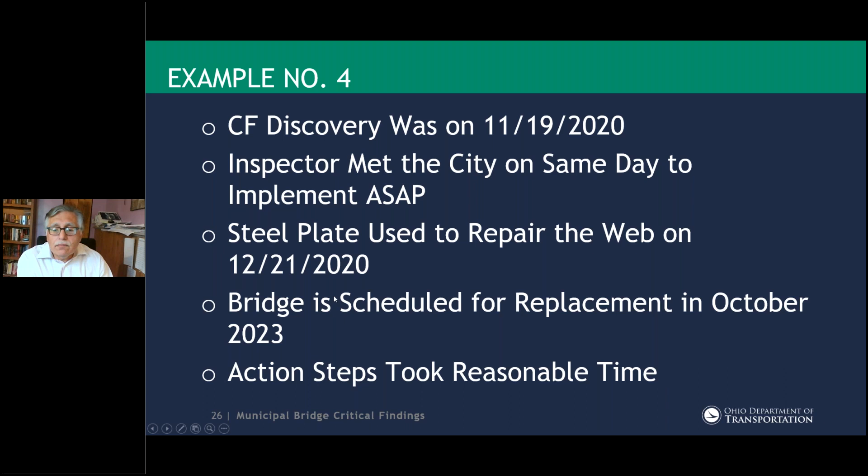It was discovered in November 2020. The same day, the inspector met with them—good job by the inspector—and recommended implementing repairs as soon as possible. A steel plate was welded on the web, which took about a month, about 30 days or so. That looked like a reasonable time frame for this example. So those were the classic examples, and nothing happened.

Another fact about this bridge: it serves a very minimal amount of people. It's a city bridge on a cul-de-sac, only serving 4 houses. Nonetheless, we need to provide safe access to them—we have a responsibility to protect their safety and make sure the bridge provides access in and out of their homes. The deck is 16 feet wide, single lane, two-way traffic, which makes sense—it's low traffic, so it's narrow.

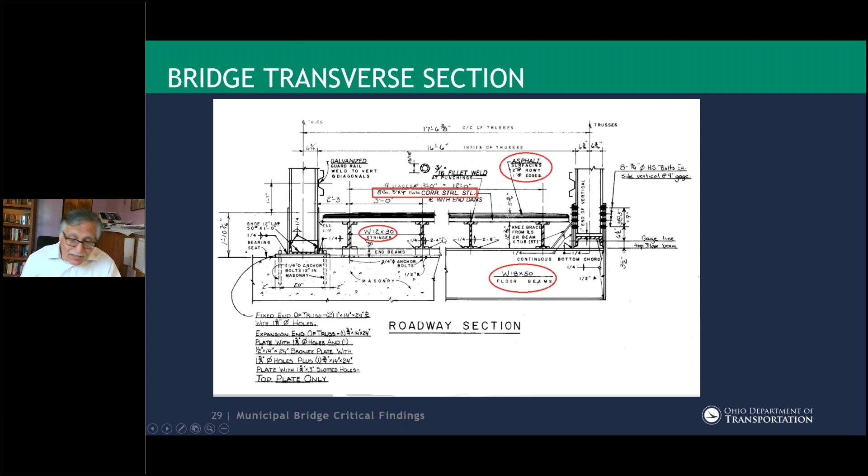Something to keep in mind is when you see a 3P but critical finding, that means it's not the super or the sub that affect the GA. It was actually the deck that caused this issue with us.

Inspector notes here. Okay, the deficiencies of the bridge taken, these are inspector notes taken from the inspection report in 2020.

Stringers were bad, 50% corrosion. There are corrosion holes. Right hand is worse than left hand, and we're considering this the south abutment, standing on the south abutment looking north, right hand side.

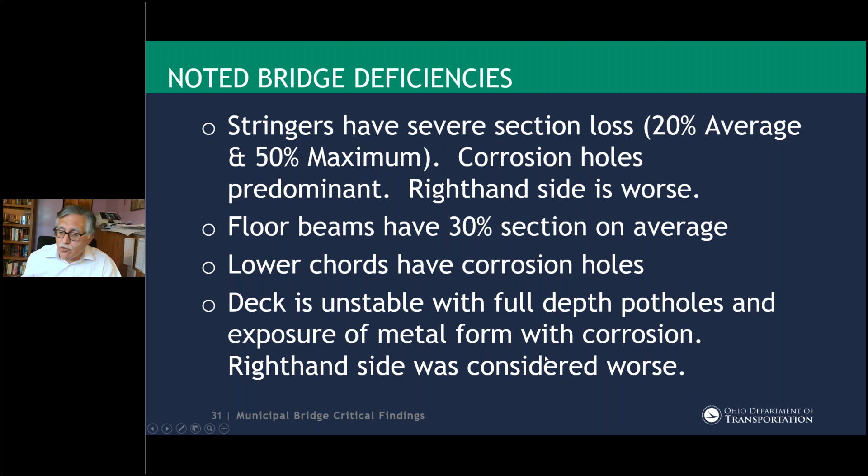And I'll show you here later a slide of the bridge, of the truss, the elevation view.

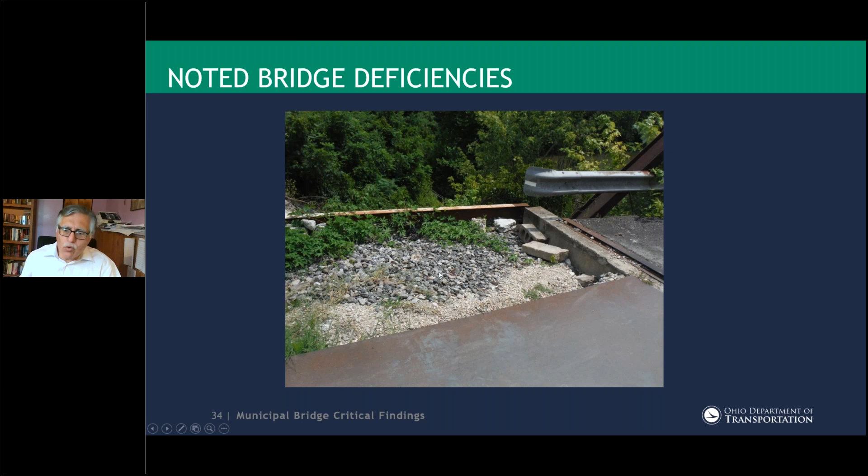It cracked and everything, so you can see why the bridge or the deck is corroded so badly like this. This is the northeast corner of the bridge, and this is the slippage of the embankment. So part of the roadway is going away, washing away, or moving away from the bridge.

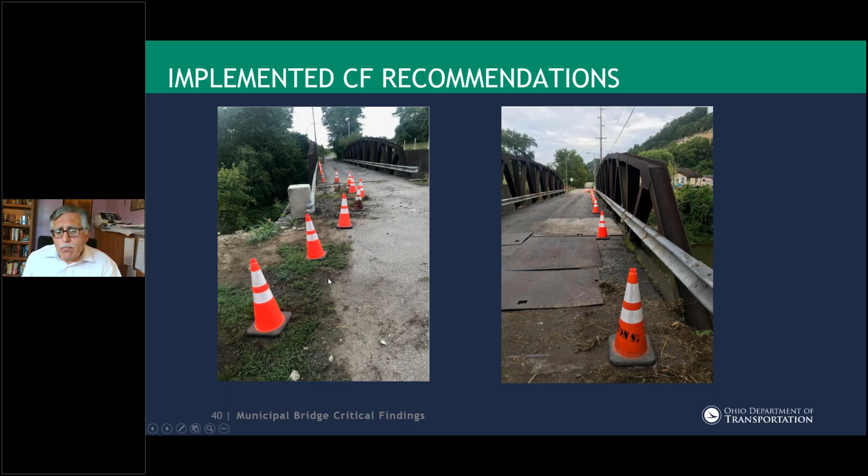This is the view of the northeast corner of the bridge, where the embankment is slipping away from the roadway. This is also the revised posting sign. The inspector recommended 3 tons, to make it more safe and to allow these people to drive back to their homes.

Again, the type, size, and location of this bridge, this truss, was not right for this location, and so the embankment is slipping from here. The channel is also slipping into the water. Way up in the air, the abutment is tall. It's a very, very unstable bridge.

And the inspector wanted to get hold of the city before they filed the report to reach into negotiation with the city to get into consensus as the manual recommended. They weren't able to get hold of them, so they held off on the critical findings.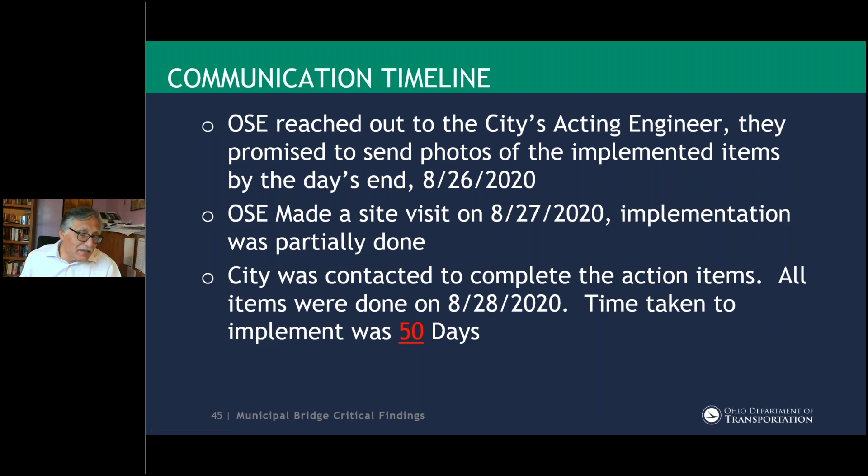In the end, we hope that municipal entities must act expeditiously to protect public safety. They need to do better than 50 days, a lot better actually. And I hope you guys on the municipal side see that as lessons learned and work with us and work with Federal Highway to make it better for the public and make it safer.

Luckily, nobody got hurt, but we're playing Russian roulette here. If we take chances with safety, who knows, it could hurt us. And then I don't really want to be in a position to explain to anybody what happened and what went wrong. I'd rather we all work together for the same objective and work diligently to protect the public safety.

Really, that's my message to the municipalities and all the public agencies. As far as our action step, Federal Highway recommended improvement in the reporting process, and that's what Jared talked about earlier. Thankfully we have that process and the notification, and now we can see it on the radar screen right away. The minute the inspector files critical findings, we're tracking it, all of us tracking it to make sure it gets done timely.

With that, I'm done with my presentation. Thank you for listening, and I will be glad to entertain any questions you guys might have.

Hey Omar, thanks, this is Mike. I've got a question. After performing a load rating that may require a temporary closure of the bridge, does a critical finding form need to be filled out then, or is that only after an inspection?

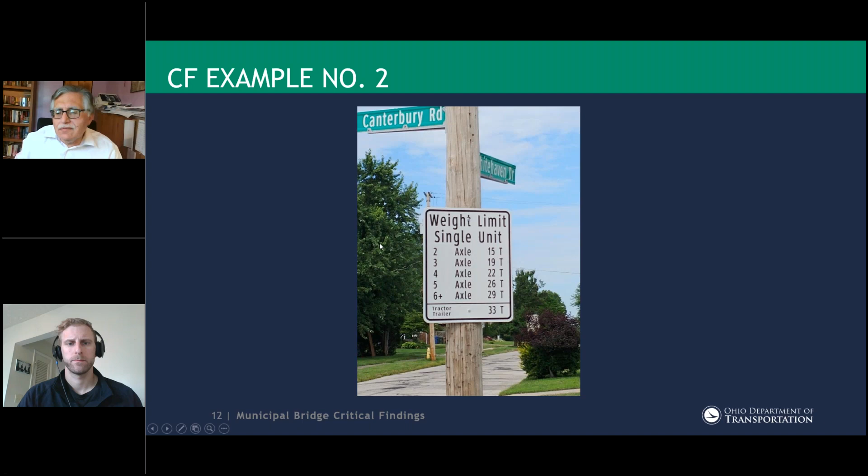Let me go back to example 1. I think that one has corrosion. Yeah, I think it's that stringer or steel beam with the hole. Yeah, that's an excellent point. I mean, I'm just gonna build on that.

A flashlight and a hammer are your friends and maybe the best inspection tools out there. I concur with this comment. I'm guessing this was hidden by corrosion, or an inspector was doing an inadequate job, or it was an interpretation and it was a 3 in the previous inspection. So whatever the case, it's now moved to a 2. So we've drawn the line from a 3 to a 2, and then that now is a critical finding.

You could have a critical finding be a 3, but we just decided to draw the line right at where the adjective critical exists on that 9 scale. You can call this a critical finding with a 3. We're not requiring it, but certainly it's something that can be done.

I think some of those are discretionary depending on the opinion of the inspector. I tell the inspector, if you walk away from this bridge, are you guaranteeing that next year, if you give me a frequency of 12 months, in 12 months, are you guaranteeing to come back and the bridge is still safe and functioning as intended? If the answer is no, okay, you better think about critical findings. What do you need to do to tell the owner what action items you should take? Yep, if the answer is yes, walk away.

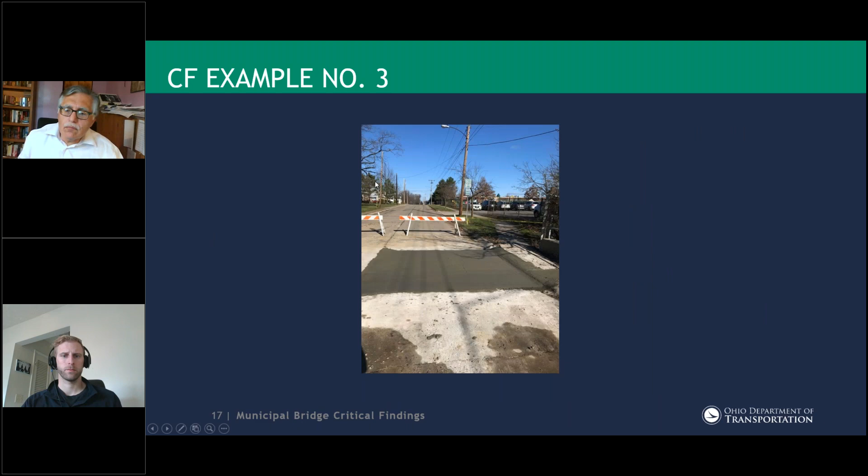Okay, you're good. I've got another comment. Last example, great examples by the way, good photos. That last example was a good instance of where a phone call needed to be made rather than relying only on email. Email, great, it's great for documentation, but phone logs work too. I concur, I agree, yeah.

With that city, we tried different ways. It was just a challenge to get hold of them. We leave voicemails, nobody answers, and we leave voicemails and no callbacks.

So email is a good way to document. There is a big advantage to emails because you can show on this day I sent this request, and on this date I received the response. You can document that. With the voicemail, it's not documentable except just writing a log about it.

Just as an overarching note, the inspection program began with a tragedy. So the whole inspection program should be considered in light of public safety as primary, and then secondary, monitoring things so they don't become unsafe, or monitoring things so we can take care of them and allocate funds appropriately.

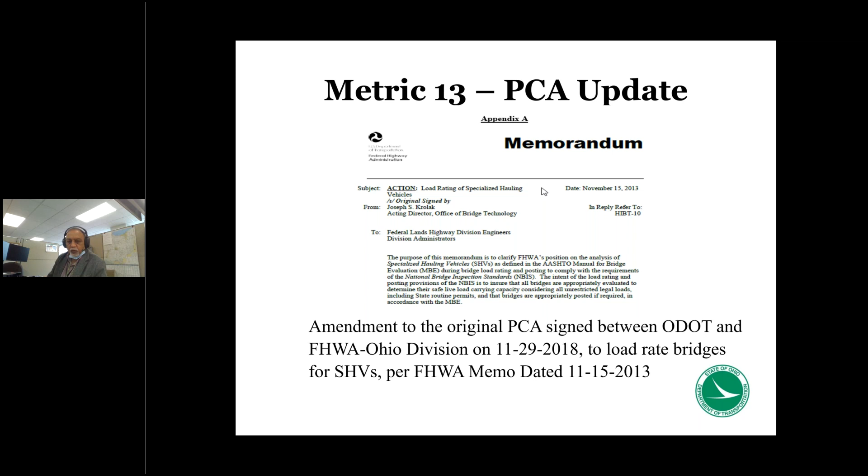So this memo came in 2013, and ODOT, after doing a lot of research, started working on load rating over bridges for special hauling vehicles. The first PCA was signed between ODOT and FHWA in November 2018.

In that PCA, which was originally signed, we identified, according to the FHWA memo, slightly less than 3,900 bridges in the state of Ohio which required to be checked or load rated for special hauling vehicles.

The duration was 24 months for that PCA. It started in 2018, so the end of 2020 was supposed to be the completion of that original PCA.

But you all know what happened in 2020. There was a pandemic, there were special extraordinary circumstances. We all went home, there were technology challenges, there were not enough resources available. So without going into a lot of details, when we came close to the end of the PCA date, we found out there were about 481 bridges all over the state which we were not able to complete for special hauling vehicle load rating.

So we had more negotiations and meetings with FHWA, and we both agreed to go into a revised completion date for the PCA. The revised completion date was reset to December 31st, 2021. In other words, we got one more year to complete all the load rating of special hauling vehicles.

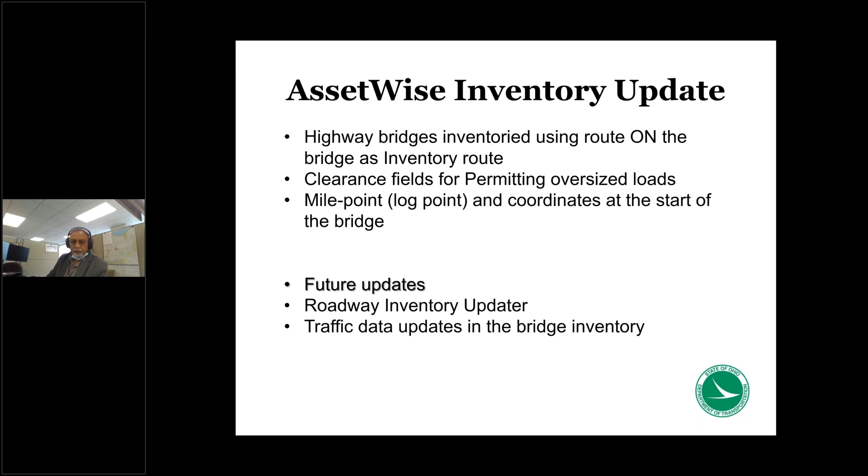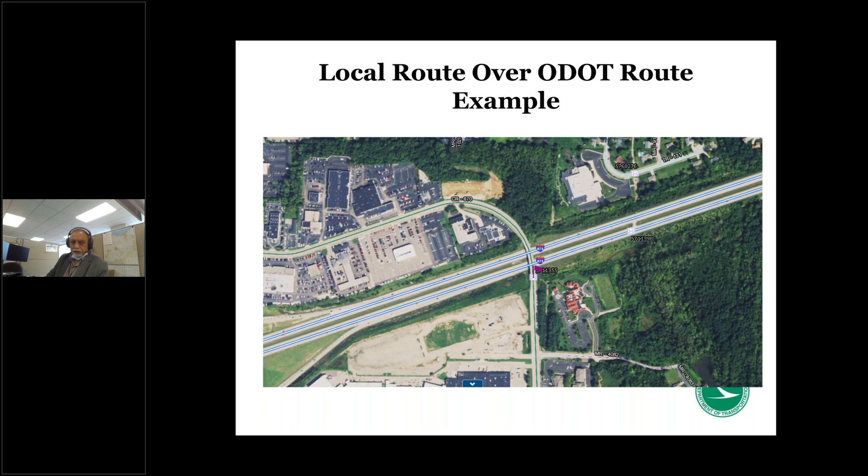I also mentioned the clearances in AssetWise. There are two types: NBI clearances and Ohio clearances. Ohio clearances are primarily meant for permitting, to make sure that when we permit an oversized load, these clearances are used, and they should be very accurate. Ohio clearances are located in two places: the Ohio Bridge Inventory Form and the Under Record Form. The Under Record Form only applies when there is a route under the bridge. NBI clearances are also on those two forms.

Looking at the Ohio clearances, when there is a divided highway, we have clearances in both directions. We have fields to store the clearances in the cardinal and non-cardinal direction. In each direction we need a minimum vertical clearance under that structure and the horizontal clearance. Similarly, on the non-cardinal direction, if there is not a divided highway, then we only store the cardinal clearances in the cardinal direction.

So this is the route - this is an example of a cardinal and non-cardinal divided highway where we need clearances on both sides. Since this bridge is a highway bridge, clearances on the inventory route, which is on the bridge, are stored in the Ohio Inventory Form, with cardinal and non-cardinal direction vertical and horizontal clearances. For the route underneath, they go on the Under Record Form, and we have the same fields.

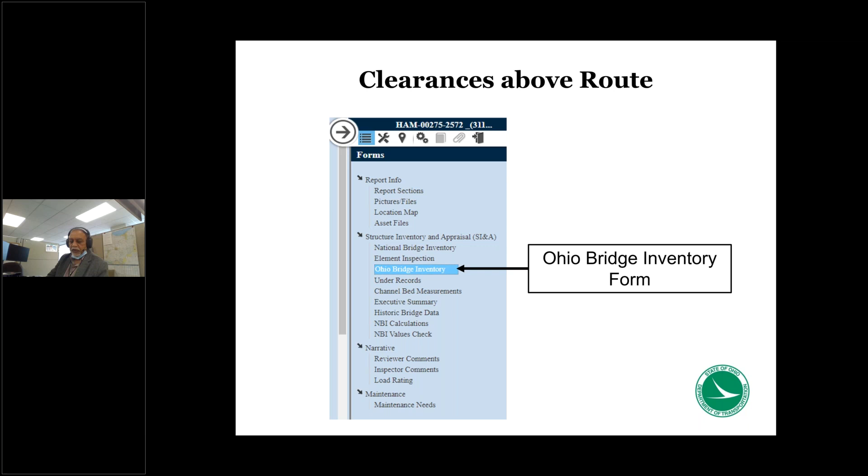As I said, those clearances are on the Ohio Bridge Inventory Form in AssetWise and the Under Records Form. Every clearance is with respect to the route: what is the clearance above the route, or what is the horizontal clearance on the route. This is how the clearances have been stored, and to be consistent, this should be the same across the state for every bridge. The clearances on the inventory routes belong to whatever route has been stored as the inventory route in the bridge inventory form.

This is the example of a county road. If the county road is used as an inventory route, then the clearances should belong to that county road. If there is a route under the bridge, then all the clearances should go on the under record form. In the under record form, the route which is specified as going under the bridge, those clearances belong to that route.

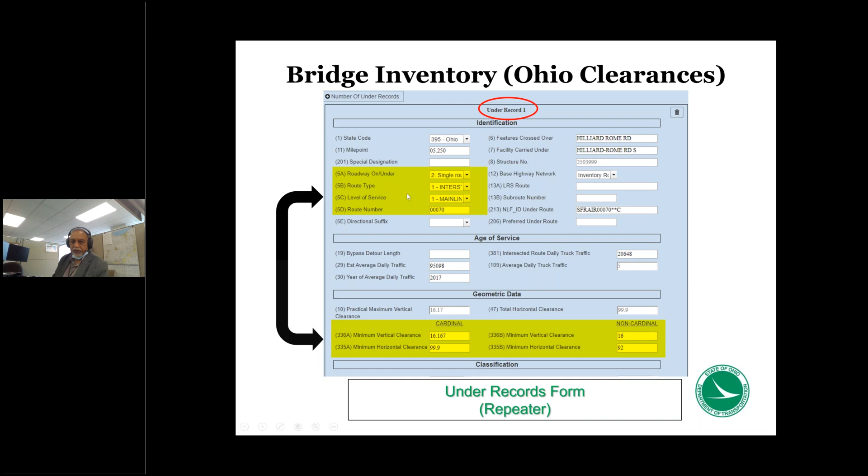Hey, thanks, Amjad. I've got two questions. How do you change the coordinates in AssetWise? Every time I go to a bridge, the coordinates are grayed out and I can't edit them. I think he means there's two coordinates, a 16 and a 16.01. The 16 and 17 are grayed out. Updating the coordinates is done manually using the teardrop instead of typing in the coordinates. So one you type in, the other you drag and drop. I think, are you going to go through an example, Amjad?

If Mike, you think I have time, I can give you the live demo for this one. Yeah, if you give a minute or less, pressure's on.

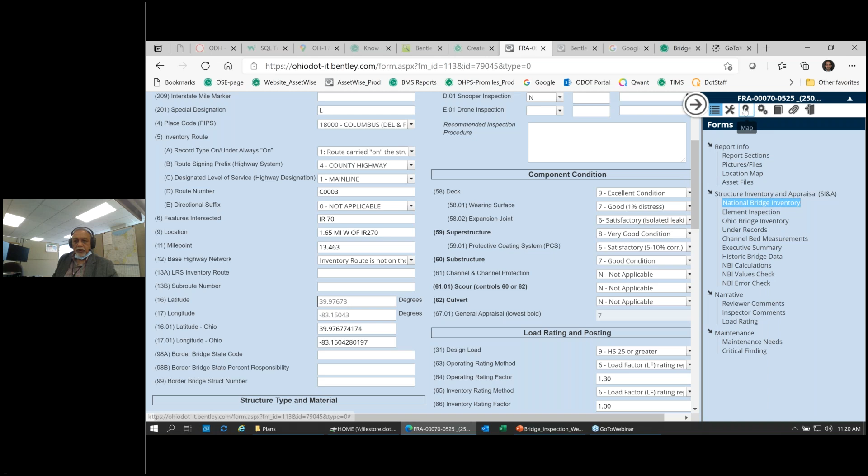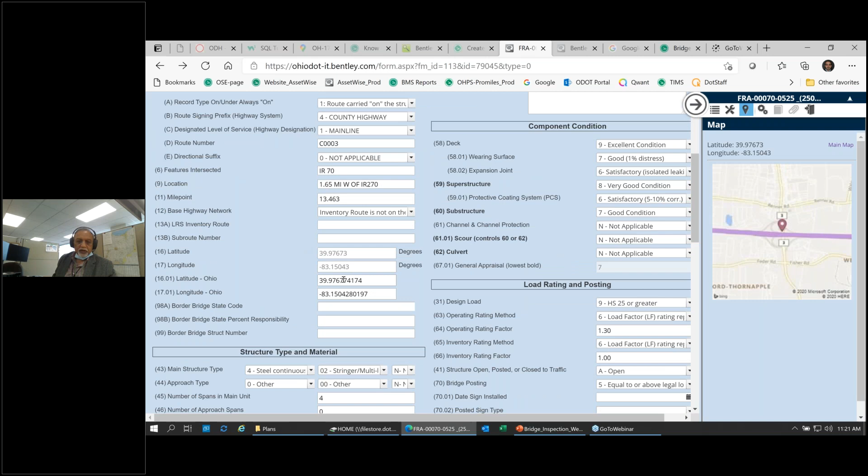So you click this option, this map pin, then click on main map. Yep, and then click on the main map. My mouse is not working, just a second. So you click on the main map, and once you're on the main map, if you want to move this dot, you hold the dot and move it to the right place. So the best way to do this is go to the aerial photograph, then you actually see where the bridge starts, move the start of the bridge to where the abutment is, and then from here you can save the new marker position. Once you have saved it and go back, you will see that these values will be changed accordingly. So this is how you update these grayed out values. Good.

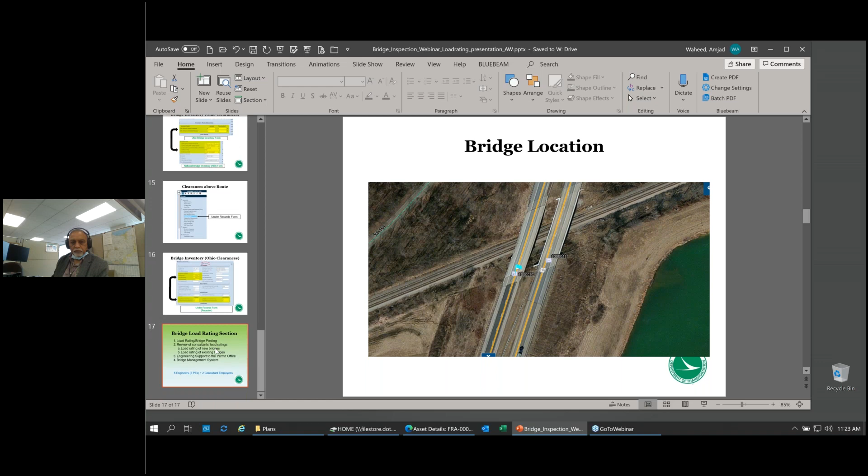I've got a question about railroad bridges over county roads. So I will guess that means, do counties have to inspect railroad bridges over county roads? The official answer is that is a bridge in Ohio. It meets the definition because it's over a highway. The responsible party, by default, is the railroad company, so the county can follow up with the railroad and ensure that bridge is inspected. They have a right, it crosses over their right of way. We in the state system, instead of working with the railroad on all the bridges, have decided to inspect those bridges ourselves with a secondary or cursory inspection to make sure nothing's going to fall onto our traffic. We've got a lot of volume of traffic, so it's a safety inspection. We have a robust permitting department, so we need to permit through those openings. So we have taken it upon ourselves to do the second inspection and the measurements. It is not required that the county inspects the railroad bridges; however, it's certainly recommended. It's a practice that we do. It is a bridge crossing over your public right-of-way.